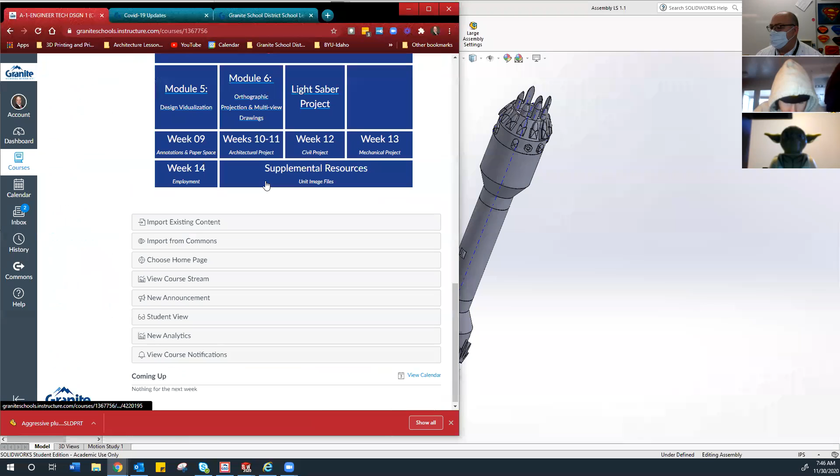So things are coming up for you really quick. Trying to figure out the best way to do this. Probably the calendar. You added a ton of files.

I did last night because I had to shift dates, I thought we had until the 22nd. You guys go on break on the 18th, and we're out of here. You have 2 weeks for Christmas, and then we come back and we have about 2 weeks.

Which is mostly testing and certifications. So certification, we hit the state test, and then what we'll do, because I don't know how many of you are back next semester, we're gonna do the SolidWorks certification. We're gonna do some prep for that. Most of you should not have any problem passing that at all.

And so the challenge on both situations is getting you all here. We won't see the spike in COVID from Thanksgiving for probably another 7 days. So, yay. Me and the boys had a good party.

I bet you did. Okay, so let me kind of show this up on the calendar to give you an idea. You should see notices come through on your Canvas feed coming up. But mainly what you got coming up here is in December.

Okay, so nothing really, I don't think I put anything this week. Sorry, yeah, I did do a couple things. So you got a couple of... actually no, I didn't for you guys at all.

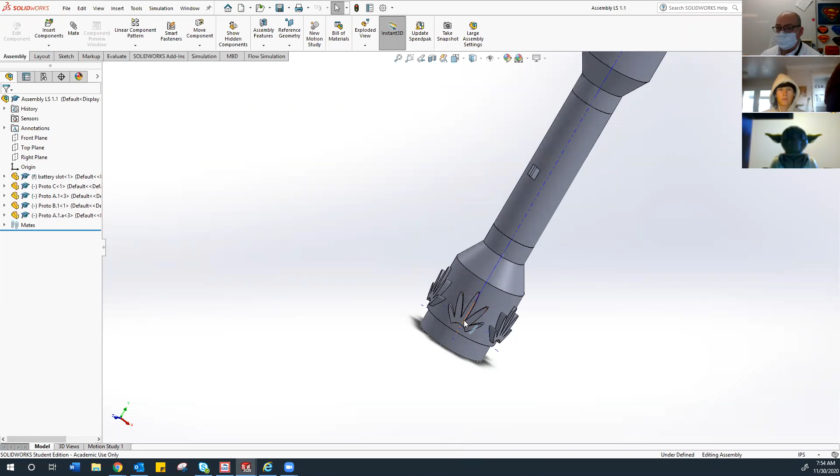Now, I'm not going to have you dimension things like your embellishments or any of these decorative items for this class. Mainly because of time and how much we've got to do for the other stuff.

So what I'm going to do here first is go into my assembly view, and we're going to create this exploded view. We looked at this about 6 weeks ago briefly and found out it's a whole new thing, which is always good. My bottom piece is my parent piece, the first part brought in. So I'll start with each piece that makes up this assembly and simply pull them apart, quite a bit apart, because it's going to take enough space.

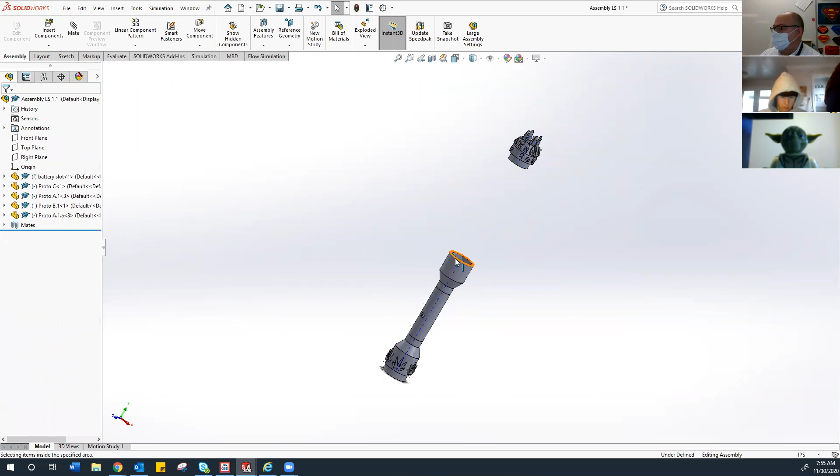Oh, don't do that, this is what I did before. Okay, so we get that one, and then we're going to do another one, maybe. Oh, this thing drives me nuts, I do not like the new change to it.

Did you ever figure out that one problem you had a while ago? Yeah, it's the same one, it keeps resetting, so we have to do different steps in it, and that's what creates the problem. So there's one. I did this fine the other day, and I don't know why it's going to fight me with it now, but it's going to. All right, hang on.

So ideally, you should be able to click on one, slide it forward. That should record a step. I'm going to just do that. And maybe what I need to do is set these all up ahead of time.

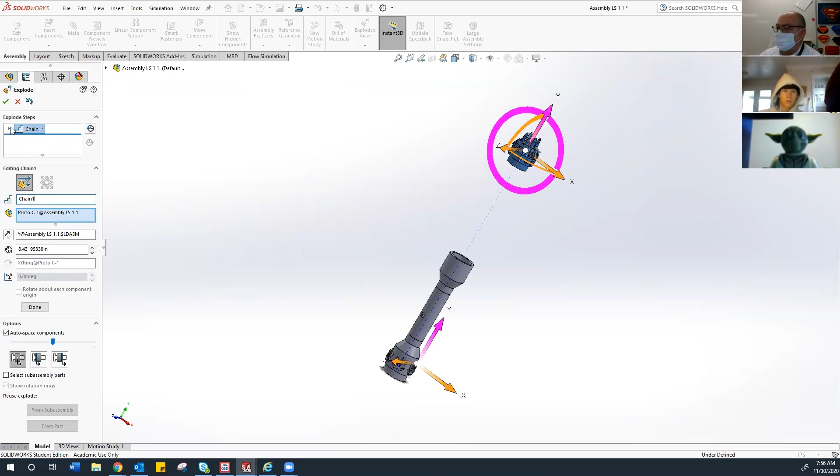So in your setup, you've got your chain happening. There's one part of it, and I need to add to that chain. That's ultimately the plan, is to add a step. So once I get it expanded out here, this is kind of the trick to it. So there's chain one, this is the proto C, that's in that step. I come down and add a step.

Okay, so I'm going to click on this, add that step, and move that where I need it to be. And it gets a little frustrating this way, but it does work. I do want to kind of somewhat try and align as I can.

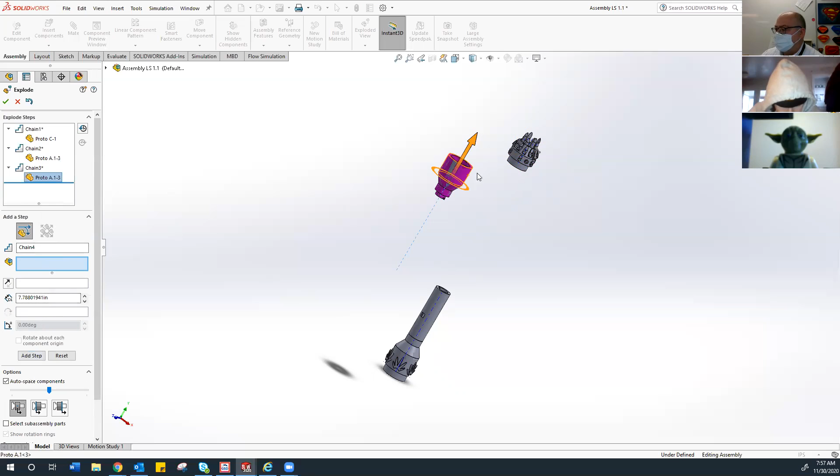So I've got these steps that are happening here, and moving things over, and each time you move, it's going to create a step. Okay, so when I do the next one, make sure you highlight the one you're at. Then I'm going to go to the one I want to change next, and then add the step.

We didn't used to have to do the add step. In older versions, you just clicked it, knew it was a different step, and that's the part I kind of miss, because it was just so much easier to align things where I wanted to be.

Okay, so that creates my exploded view. Okay, when I'm done, I'm just going to hit the word done and check it off. And that just stays there.

Okay, now I'm just going to leave it that way for a moment, because we have to change topics for just a little bit. Okay, we have to set up our paper to print these off, because we can't.

Well, it's nice to 3D print. When it goes to manufacturing or it goes to be patented, it has to be in drawing form. The patent office will not accept a 3D model anywhere. It has to be in drawing form. And it has to be very well dimensioned, because the size of things are what allow new patents to occur.

So if I'm working on... but you can't show them a 3D model? Because there's a guy in my neighborhood who said he works with patents and whatever, and he said if you bring a 3D model to drawing, you're more likely to get the patent. If you have the drawing, you have to have the drawing, because that has to be filed. So if you have just the model, you're not there.

You have to have that plus the drawing. Okay? That's what I'm saying. You can't just take, oh look, here's my little rocket, make a patent for it. This is not enough, okay? It has to have drawings with it. Okay? It has to have those drawings.

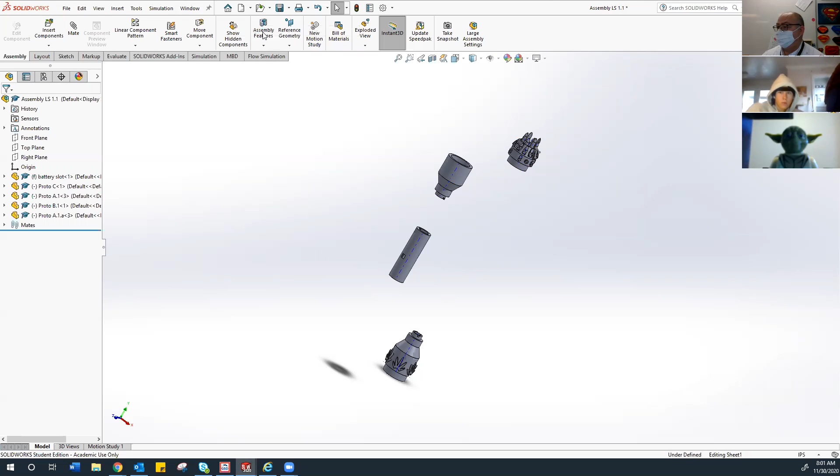Now, what we get here when you get to this point is the standard sheet sizes used in the industry, represented for our country by ANSI, the American National Standards Institute. That's a test question for both state tests, and you'll probably see it at least 4 times. It's really important you understand that ANSI is the governing body for the way we submit documentation.

So it tells us how designs have to be shown. We have a couple sizes here. An A is a sheet size, an 8.5 by 11 sheet of paper or copy paper. It can be landscape and portrait. Does anyone not understand the difference between landscape and portrait?

No, I didn't go to 3rd grade. You didn't? No, it's like the easiest question. Who doesn't know landscape and portrait? Well, you'll see on the test when 6 people miss that one.

Okay, so remember landscape has the 11 going horizontal. That's the big difference on that. Then you have B size.

No, the connection's bad. I had to go back and realize they didn't know the difference between landscape and portrait, so they're like, oh shoot, let's go Google that real quick. Welcome back, everybody, we had a little power outage there. Sorry about that.

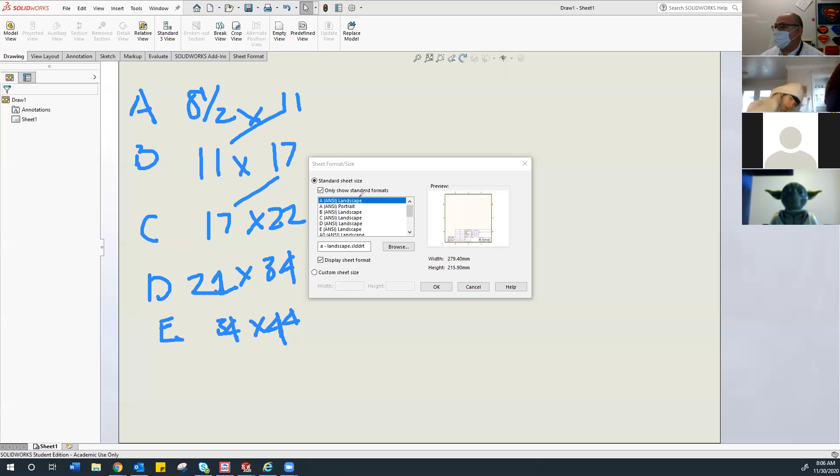Okay, so for this project we're going to use an ANSI B. I'm going to clear my screen here with this ANSI B landscape, and I'm going to go ahead and open that up. Now when we open it, on the right-hand side you're going to see your lightsaber in all its glory. You should also see the exploded isometric, that's what we set up ahead of time. If you don't do the exploded view ahead of time, it will not show here, that's the big key on this.

Now, as we look at this drawing, there's a couple things about engineering paper that's important. One is if you get a phone call from someone in, say, India, and they're doing your manufacturing for you. India typically does IT work more than anything, but they do have some manufacturing. They do whatever they're paid to do.

But maybe we're having some manufactured, and we have it manufactured in a different country.

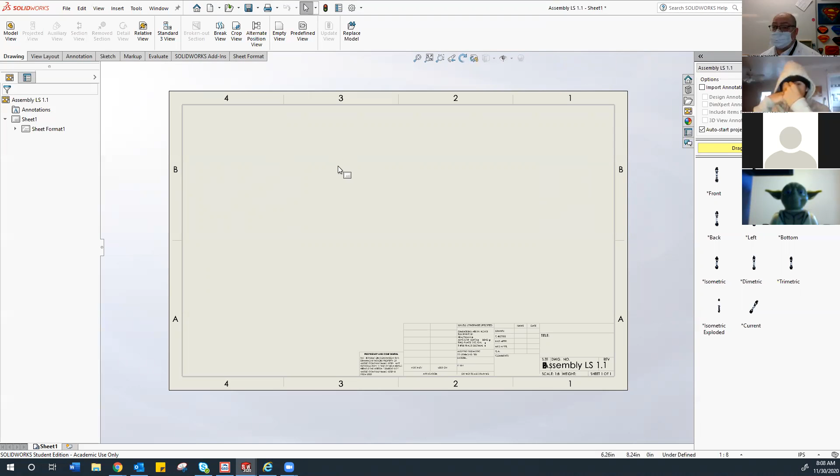So when a manufacturer calls you and says, hey, I have a question about this detail in B3, you can look at that information and say, okay, I understand, this is what you need to do. Or maybe I don't understand this note you put in A2—what do you mean there? Well, A2 is my title block area. So if there's information here, we need to be aware of that.

So we need to get everything adjusted so it all fits on our sheet, and what you do on this sheet will apply to all of your sheets. Some of you will have six sheets, some will have ten, depending on what you've done with your lightsaber and how that's going.

And we are really having a hard time with the internet today.

Hey, I have a quick question. Yeah. I was trying to draw something, and all of a sudden this blue background came up around the drawing, and it wouldn't let me do anything in the model. I closed out SolidWorks and opened it up. I took a photo. Yeah, let me look at it a little bit here.

Okay, so let's zoom down on this title block a little bit. It will have the name of whatever you name your file, and in this case, it doesn't fit in the title block—it's too large. So that's one of the issues you have to work with as you go. We have a title area and a blank space above here.

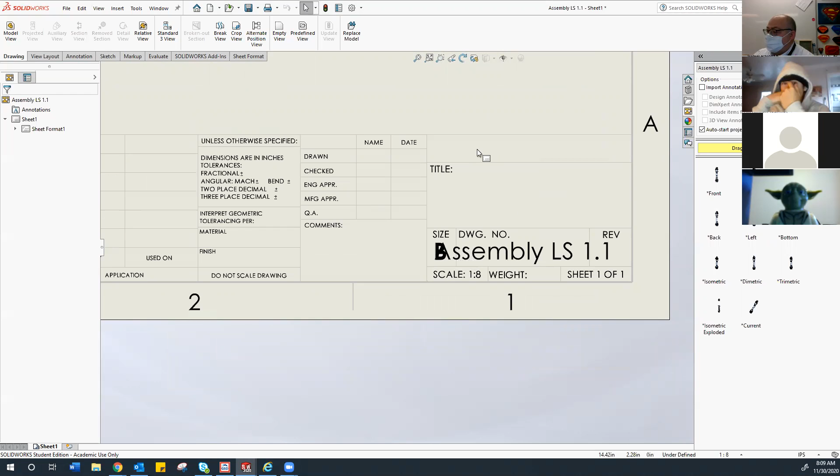We're going to set this up to what needs to happen here so it hopefully carries through. But in order to do that, we need to edit the sheet. Now this is where it gets a little cumbersome—it's meant that way because we don't want to erase this by accident. So over on your left, it'll say Sheet 1, and underneath that will be Sheet Format. Let's take a look at what we can do with our sheet as we move through this.

If I right-click on Sheet Format, you get a whole bunch of information—you can put a grid to it, edit the sheet format, lock the sheet's focus, add a sheet, copy a sheet, delete it, access its properties, and there's also all your constraints that go with it, like your relationships to snaps.

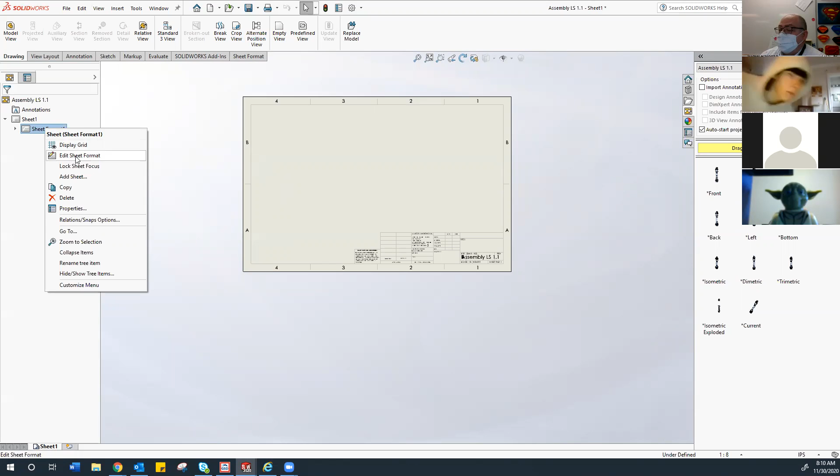Go ahead and select Edit Sheet Format. When you do that, the part you can edit becomes blue—everything's outlined in blue. This is what we can edit, and that's a good thing, so now I know what I can edit. Notice things have changed—I now have columns and grids like in a word processor across the top, as well as a ruler going down the side. So if I zoom up on that, those columns will adjust to that zoom factor.

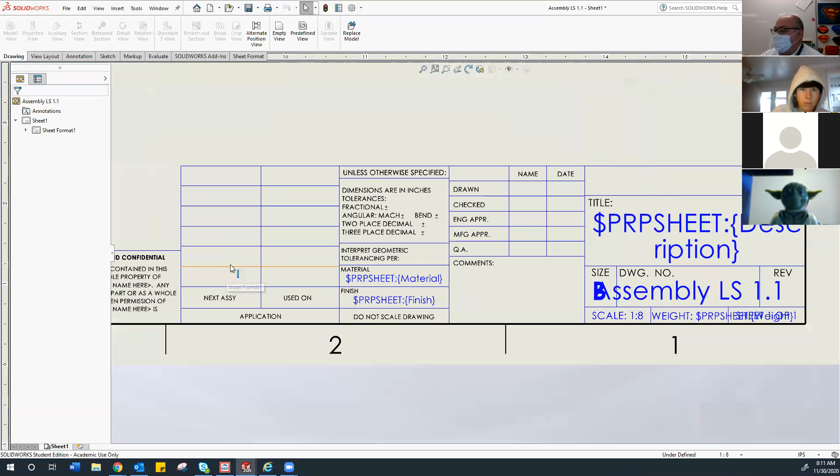And what we want to look through here is what we want to change. So one, there is a proprietary confidentiality statement given. As soon as you put your work on a title block with your name and a date, it is automatically copyrighted. It is not trademarked, it is not patented, but it is copyrighted.

In 1990, Congress passed the 1990 Copyright Act, mainly for the music industry. At that time, China was being a little more bold than they are now with ripping off music albums and selling them wholesale.

That Copyright Act meant you have intellectual right to whatever you put your name and date on. So if you're working with a client on a new design—say a new bike or a new sprinkler—anytime you do a sketch, anytime you run anything in your design process, put your name and the date on it. If I'm doing a house plan and sketching on notebooks or napkins, name and date, because that holds my intellectual right to that design. Does that make sense?

So here we can edit this text, and you can come down here and in the brackets—you have to double click—you then get a text box, looks like so. When you get to that edit mode, you can come in and create either your name or your company name. This is my company.

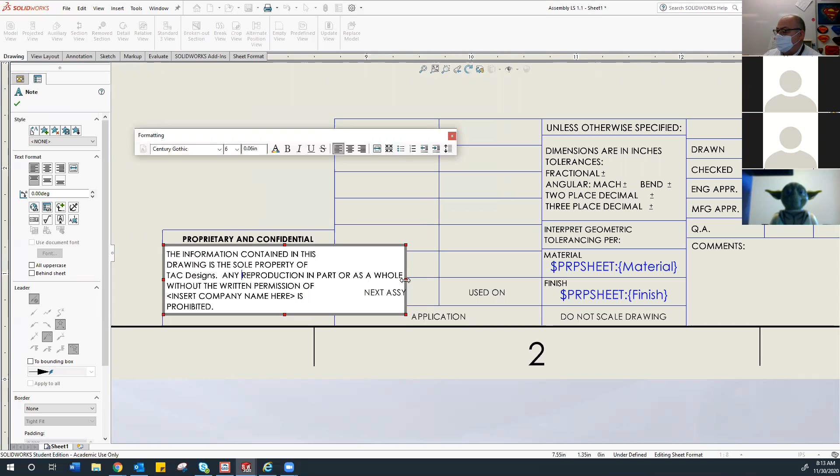And then you can adjust your sheet and such so that you can get everything to fit into that box. And so you kind of work with that.

Again, it's two places where that has to occur. And if you don't have a company, you can just use your name, and that works. You just kind of get that in there so that you have that intellectual right. That's the first thing you want to always adjust on your title block. Make sure your name is there. Now, some companies choose to remove that. That's their choice. They do it another way, with legal documents instead. But you do want to make sure you have that.

And then do take the time to go in there and clean up the formatting so it's a little easier to read. You know, just kind of like you do for your English teacher that you hate. Make it look neat, okay? Just take a few minutes, because this is what people are going to start judging you by as a designer.

Okay, then we have the application set here. This application is dealing with how this relates to something else. So if I was designing a battery compartment, and that battery compartment is going to be used on multiple products that I design. So maybe I'm doing night lights, and they have the same battery compartment for every night light. Then I would say, okay, this is where it's used, and it's used on this part. So this part of the assembly is used on this other project as well.

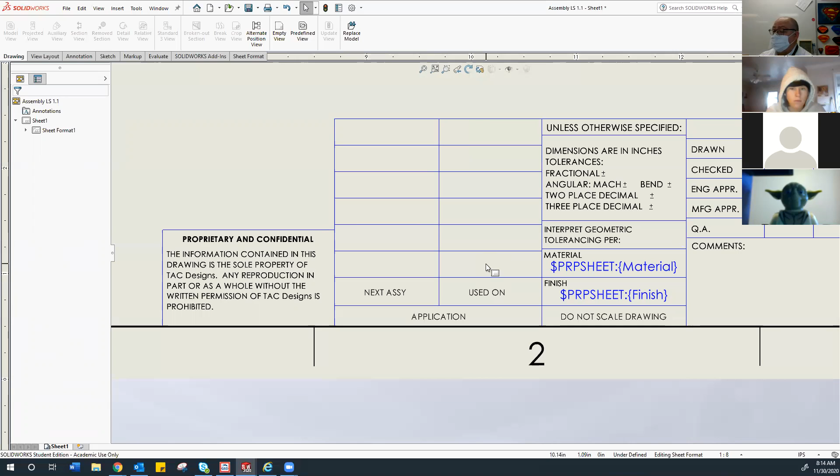You start cross-referencing your files so that when you have your office running well, you know to tell your employee, okay, go get part 7429, and that's going to go with 1830. And you start mixing and matching. So if you go into an auto shop store, you often find that type of thing happening where all the parts for one vehicle are cross-linked by number. And if they are universal in their nature, say like a light bulb, it's cross-referenced as well, okay?

Then we have over here, unless otherwise specified, dimensions are in inches, because this is an ANSI file. If this was an international file, it would be in metric. And this talks about our tolerances, our fractions, our angulars, plus or minus, and notice there's these plus and minus. So tolerances are a deal here.

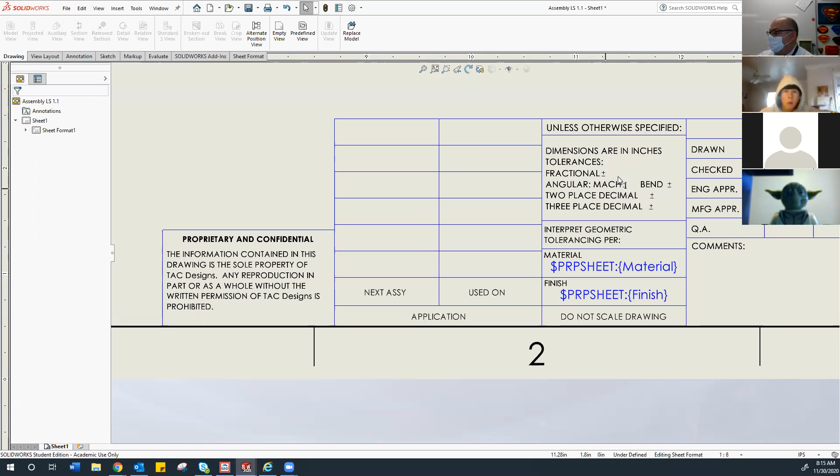Let's edit this now for what we're looking at here. So we're going to double click in this area again. So dimensions are in inches, and then tolerances are going to be a space, and we always start with 0.003. Okay, so we're going to 0.003 of an inch in accuracy for our tolerances.

Our fractional values, okay, are going to be plus or minus. And the thing is we typically do not put fractions on an item, but we're going to put one here. We're going to go to nearest 1/64. Plus or minus a 64th, which gets us pretty close to 0.003, but not quite.

Go have angular for the machine and angular for the bend. I usually leave these blank because I'm not doing any angles on the lightsaber. So if they're not there, don't do them. If you then do angles, then we want to put those in. These are degree marks, and so in order to understand that, I usually do not do any degree. That is, again, 0. Notice my title block expands.

If I'm machining it, I'm not going to go any more allowance than 0.02 on that. Back that up. And then same on the other side. I'm doing a bend. And now I notice I'm not quite fitting anymore.

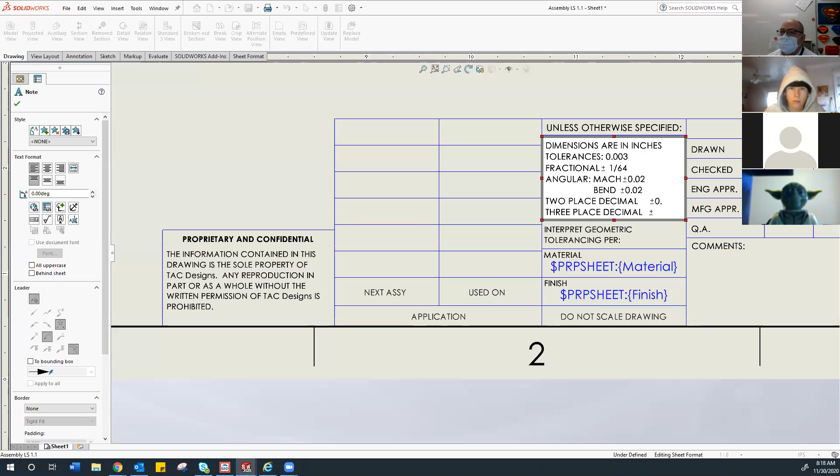If I'm using 2 places of decimals, that's going to override this. So if I'm doing 2 places of accuracy on a decimal, start with a 0, because the decimal point may not show up if they Xerox this, or even photograph it. We want to make sure they understand there's a 0 there. So if I'm going to 2 places of accuracy, that's 0.02. Let's go 2 there. And if I go 3 places, 0.003.

So I'm a little looser on the 2-place accuracy, but a little tighter here. This will all come from working with your engineers and design charts, and we'll look at some of that today as we go through. So this is kind of a heavy lecture day, so apologize for that, but not really.

So once you're done, click off of it and it's set there. This information, if it's here in the title block, I don't have to put that on my drawing. It's taken care of, and that saves some time.

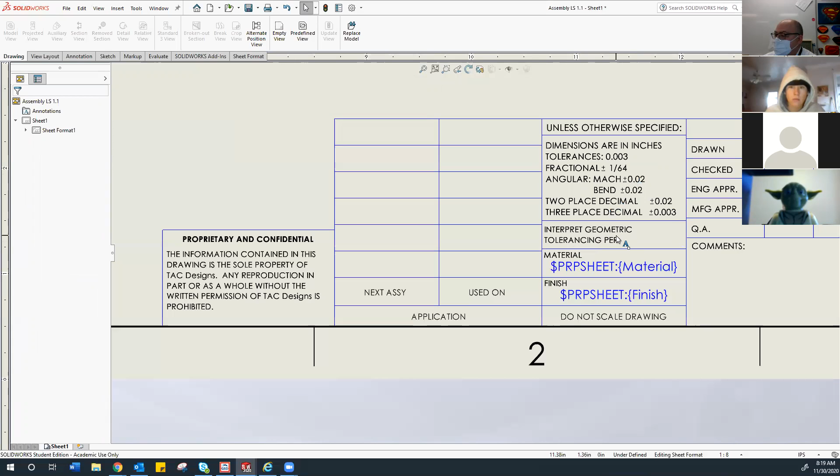There's interpret geometric tolerancing, I usually leave that blank. And then we have material. This is a hyperlink, so when we assign a material to your lightsaber, it will stay there. I'm not going to worry about this or the finish because we have not assigned that yet manually. I'm waiting for you all to get them done so we can do this all at once, and then we'll get that assigned. Kind of fun.

Sliding over, this is going to be super duper important. Your name needs to fit in here. Now here's the deal, your names will not fit in that box. So now we've got a little bit of a problem, because some of you have the same initials, which makes it really difficult to figure out who's who.

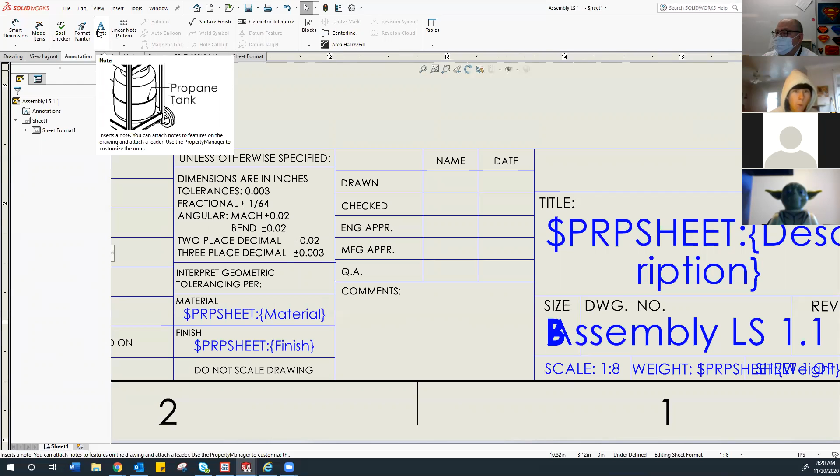So if you're going to add text to a box, which is what we're going to do, I need to go to the top of my screen and hit annotation. Annotation is the proper word for text and numbers. I'm just going to add a note, and then bring that note over to my text box. Now if you hit a line, you're going to get an arrow to it, called a leader line, which is great for the drawing, not so great for the title block. So if I'm trying to get that in there, I've got to position it so I don't get the leader.

And then I'm just going to put in my initials. That's all it's going to take. Now that is going to be way too tall, I can see that already. It's not going to fit well. If I click off, it'll work. But notice anything else I do is going to have that same text, so be aware that once you start typing things, it's going to be the same.

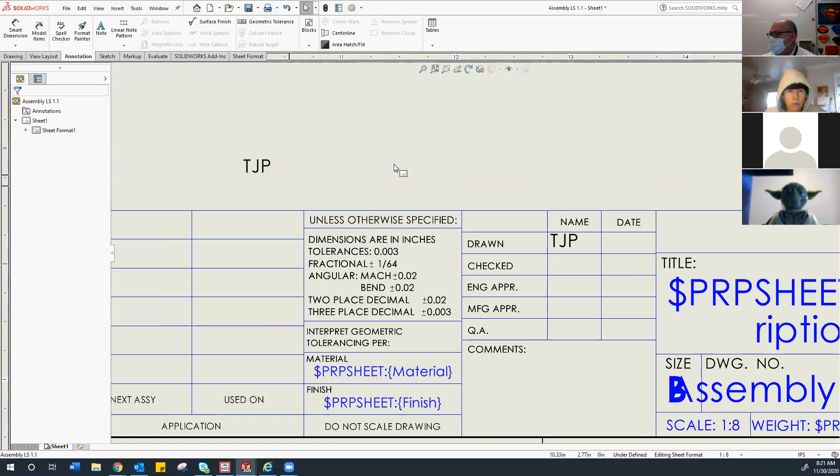So I have to go back in and make sure you hit the green check mark to end that line of text, and you might end up with extra ones on there. Just select them, maybe, and get that to go away. Weird.

You could make an annotation, a note. Oh, it wasn't there, it was a ghost. And then put the date in as well.

Now the date, this is kind of a tricky one because it's dependent upon your office standards. In some offices I worked in, you put the date you finish the project. Others, you put the date you start the project. We then put the date you finish the project.

So again, you want to get your text box. If you have a hard time getting rid of that leader, put it up above. And this is the format we're going to use for our dates: we're going to go the month, slash the day, slash the last 2 digits of the year.

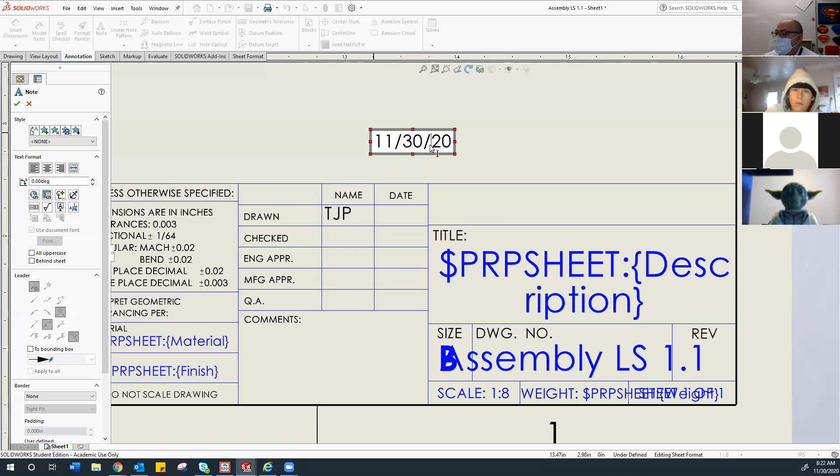Now we're going to have a problem in about 80 years. Here's what the problem's going to be: CAD software only started in the 1900s, so 1980 actually. So we know that if we could have this be 1920, it would not be 1920 — we know that because of the nature of the drawing. Once we get to 2120, we're going to have to start including all 4 digits of the year. So your office may say, nope, put the full year in, because they want to avoid that problem with archive drawings in the future.

Some of you that go and work for an engineer, your first job is going to be cleaning up the archives. That might mean going down and actually moving drawings and file folders, or opening up the digital files and making corrections to those.

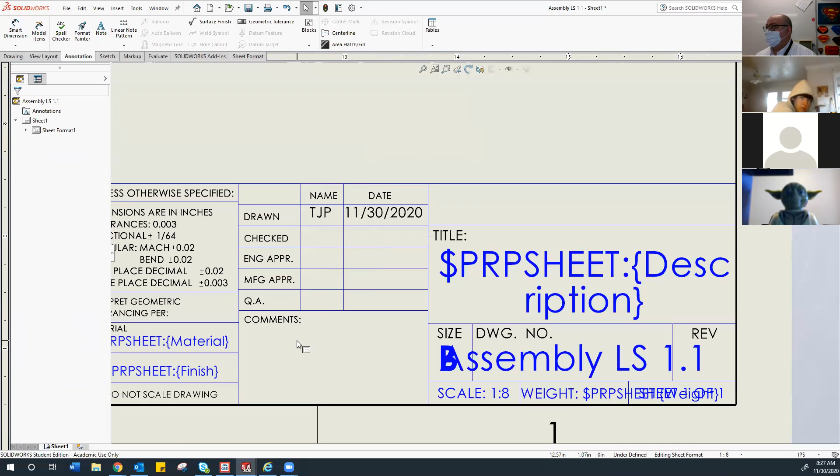Then you've got your manufacturer's approval that says, yes, we can make it for the price we agreed upon—we have the tools set up, we have machinery set up. Then there's a Q.A. area: who do you contact if there's a question? That's usually going to be the lead designer on the project. And then there's comments—things like, hey, well let's put one on. Well, we don't have one that we set up, so it might be something that says all fillets are 0.25.

Okay, so Mustafa's giving me a text chat here. So in your comments, there'll be things that are standard for it.

So you might say something about, well, we'll do this one. I think this is one that exists for a lot of you. I'm going to put a little text down in here, and on this it says all fits are friction... let me get my fingers in the right place. Hold on, disparage me later. So that's a legit note there. It reads funny, yes, I know that.

All fits are friction fits, meaning it just slides together. I didn't do any threads, I didn't do any fancy connectors, there's no peg and hole system—it's just a friction fit. Because the manufacturer is going to question you: how are you holding this together? Well, it's just going to be a friction fit. Or it could be all fits are glued. If you're going to glue them all together, then you have to say they're going to be glued together. I know it doesn't look like they're going to stay connected, but my intent is you glue the thing, okay? Because that will be a different set of costs to the manufacturing. If I've got to go through and have someone glue these all together before I ship it out to sell, then I need to include that in my estimate of cost and in my bid, okay?

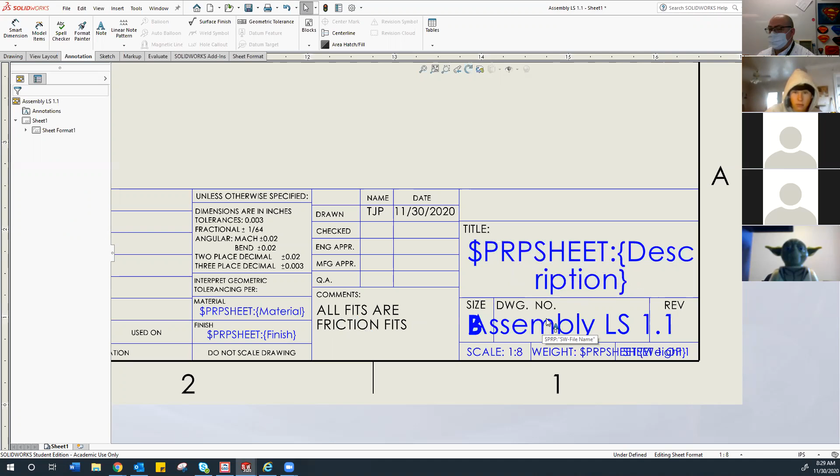Well, that doesn't say a whole lot. You can edit the name. Double click, and we can get that font. I'm just going to change the name. And notice I'm now working in capital letters. That is industry standard.

We do capital letters. Why would we do all caps? Because it's important? No. Here's a couple things to disparage your poor English teacher. One, if you type an email in all caps, you're yelling at people. That is what it defines as. If you do all caps, you're yelling. If you bold all caps, you are furious with it.

Okay, in engineering and architecture, we do all caps because it's easier to read. If I had a lowercase e and an a here, and I Xerox this sheet a lot of times, maybe it was a third generation copy, I wouldn't be able to tell the E from the A. It's going to get a bunch of shadow effects and toner marks. So in our industry, we do all caps for ease of reading.

It keeps making mistakes. The only time you use a lowercase letter is if it's part of a catalog part number. So if I need to order battery E724A, I would put a lowercase for the E, because A would most likely be capitalized. So if it's a catalog reference, I match it exactly as the manufacturer says to use it, so I get the right part, because capitals mean things in our industry. But for what we type, that will always be all caps, okay?

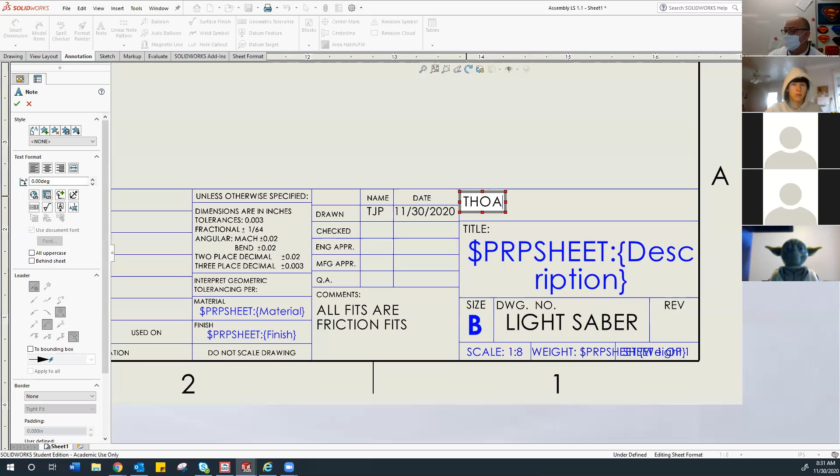Now, what I like to put in this top blank right here at the top of your title block is your actual full name. Mainly because there are a few of you here with the same initials. So it's another note, just here at the top, and just type out your full name. You have to remember not to space. Just put your full name there, so it's quicker for me, okay?

Now, this here will happen with your title block size. If you change your title block size, this letter will change. And down here, we have... I can't remember what this is down here now. The weight of your object and the scale. Right now, the scale of this drawing is 1 to 8, which means it's an eighth of its actual size. Well, that's probably not going to work, but it's going to work for what I need right now.

So we'll look at these as we get more of you finished with your lightsabers, okay? Because you're going to render them out as well, since we need to do some rendering. And somehow we're going to get this all done in 2.5 weeks. We can do it. Okay, so that's all to have you change.

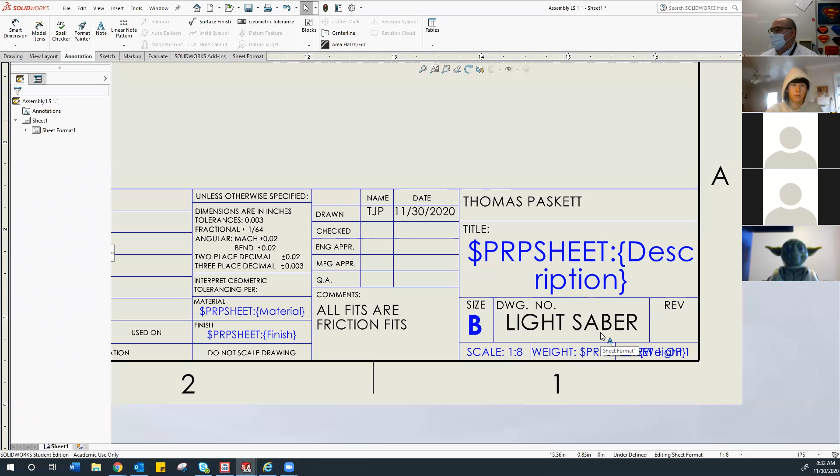Let's talk about the revision box right here. If you get your lightsaber done, you print it and you come back and say, hey Dr. Paskett, I really messed up, I gave you the wrong part and they don't fit together, I need to redo this. Then we'd have revision 1. So we always start with no revision, and then we number each revision so we make sure we keep the drawings correct, so that if we have to reproduce it, we're not getting the wrong file out there.

Really, really important to keep track of revisions, especially as things evolve over time. So if you look at Air Jordans, the shoe, how many versions of the Air Jordan shoe have been produced since Michael Jordan played in the NBA? Each one has a revision number. Nike can go back and reproduce any shoe that you want them to. Everything can be rebuilt. You just have to call them up and pay the special processing fee, but they can redo any shoe they've ever made. It's all in their system because they have all their revision numbers.

Super, super important, because there are some people out there, mainly people who make a lot more money than I do, that will only wear one type of shoe.

And they have to have that shoe for every game, or if it's not lucky, they're going to lose. Shaquille O'Neal is one of those. He's worn the same type of tennis shoe his entire career. That's the only one he'll wear, so they custom make the shoe.

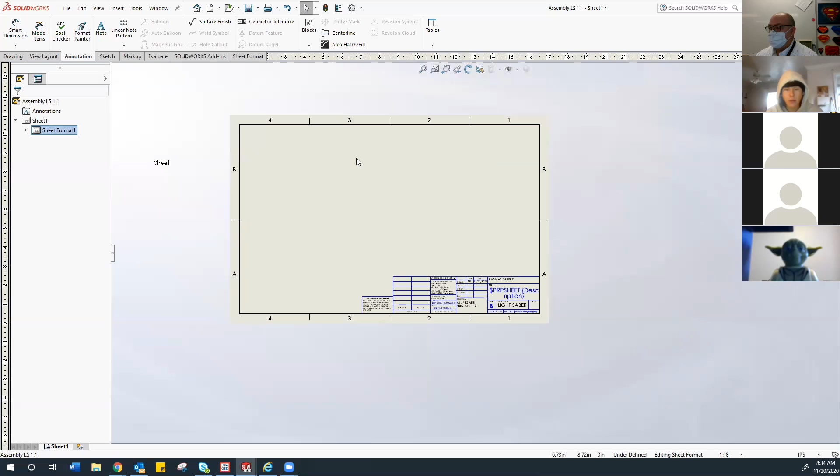If you're over the side, you get one set of notes. If you are over on the drawing and you right click, you get a different set. So if you go down, you'll see edit sheet again. If you click edit sheet a second time, it takes you out of the edit mode. It's a toggle—either you are or you're not.

You can also find it under sheet format. You can edit the sheet, or you can right click and hit edit sheet again, and you're out of the edit mode. That's how you get out—you just reverse what you did. Okay, so everything's down in here.

Let's talk about this scale issue. Your lightsabers are supposed to be 12 inches or less, okay? So if my drawing is 17 inches wide, because it's a B size, I should be able to fit the whole thing on in real life size. That's really assuming an awful lot, so 1-to-1 would be great. Now for this first sheet, that's probably not realistic because I've exploded it and pulled it apart. I'm probably closer to 20 inches wide with it now.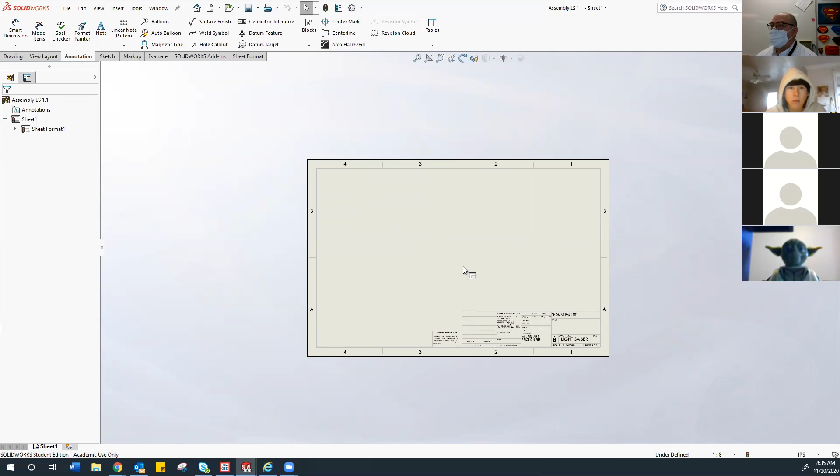So I'm going to change the scale of this drawing. I'm going to come back over to the sheet. If I look at sheet 1, it says sheet format, and I right click—oh wow, look, I get the exact same tools. The same tools come up again, and that's intended, but you need to make sure you're clicking the right place.

They look exactly the same, but this time I want you to go down to properties. So we go to properties and we get everything about the sheet that we want here. There's a lot of information here, and a lot of it applies to your state test. So yeah, we're getting down to where it's all getting exciting. One, it tells them I'm sheet one, and I'm going to leave it sheet one for right now. I can come back and rename the sheets anytime I want.

And I would do that so that I know what I'm looking at. As we finish through this week, we'll do a lot of renaming, so just be aware of that. It's a good exercise to use. It's the same process you use for Excel, for those who have the Excel class. The same process you use if you do multiple PowerPoints. It's the standard Windows activity.

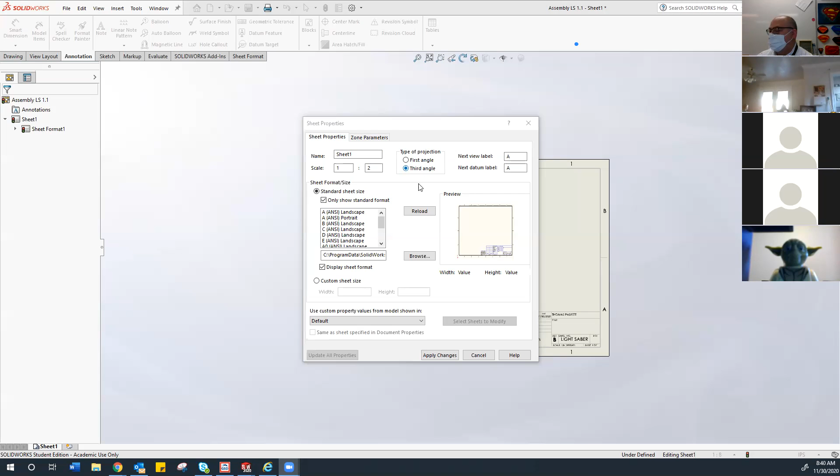Okay, go ahead and hit apply changes. And if we look now down at our title block, the scale has changed. Our sheet number is still sheet 1 of 1, but we haven't put a weight. We cannot get a weight until we assign material and finish it. So that will be coming as we go.

Okay, so my title block is ready to use. Woohoo! Now the fun begins. You will have eventually a rendered image of your lightsaber on this first sheet. But we also need to explain what is on the sheets to come.

This is our title sheet, meaning it's going to be just like you would do in an essay, a novel, or a book. We have to tell what we're going to look at and where to find each element. Now, remember on the right-hand side, I used to have a whole bunch of stuff there. That's kind of gone away as we worked on things.

So over on the right-hand side, you have a little house - that's your resources. Then you have the design library, we'll look at that probably next week. Then you have a file explorer - woohoo, that's kind of cool, which is just like the one at the bottom of your sheet. Then you have your view palette. That one's going to be important, so remember view palette for right now.

Materials, you have your custom properties and your SolidWorks forum. The forum is kind of like, hey, I've screwed up my drawing, how do I fix it? And people who are nice will help you, and people who are not nice will make it even worse. So read carefully in the forum - there's some real jerks out there.

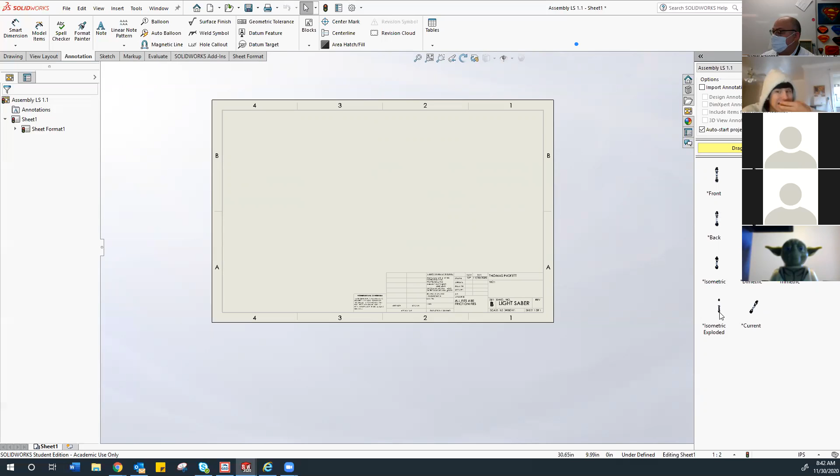I did the explode view intentionally, so I take the explode view and click it with the left mouse button, then drag it onto the drawing. That is not the view I saved, but it'll work.

How nice. Okay, now if I look at that and look at my exploded view, that really wasn't the one I wanted. So let's go to the current view and see if that one's better. Oh, no. So I'll put both views on, okay? Basically, they both will work for what we're doing, and maybe it'll be easier if we just skip the exploded view.

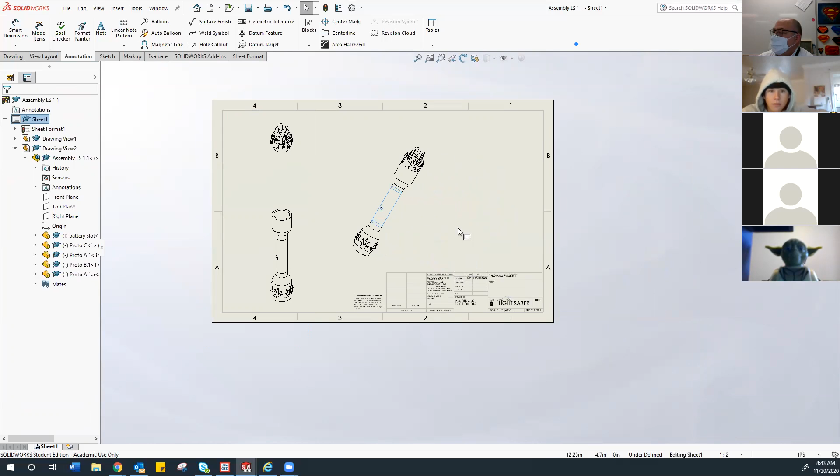I don't know, I like the exploded views when they work, but when they don't, they're kind of a pain. So I have my views on here, and go ahead and put one or two views on your sheet so we can talk about what we can do there.

Now, when we look at these, obviously I'm missing what I thought I had saved, and I apparently didn't save it right. I could probably do this - go back into assembly and just hit save. Well, it didn't save it, did it? Huh, interesting. Okay, never mind.

Don't worry about it. Don't worry about the explode view. I've got to practice it better so I can teach it better. I messed that up enough. I'll take full responsibility for being stupid there.

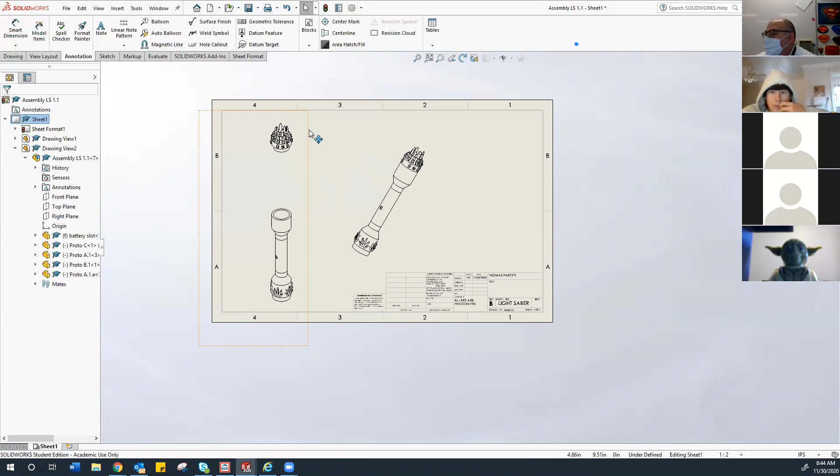If you get a view in that you don't want, your cursor floats around to get an orange outline of the viewport. If you don't want it, you can select it, right-click, and then delete the viewport. It'll ask if you want to delete that view, since it doesn't want you deleting things you're using. I'll hit yes there, and that view is gone, so now I have this view left.

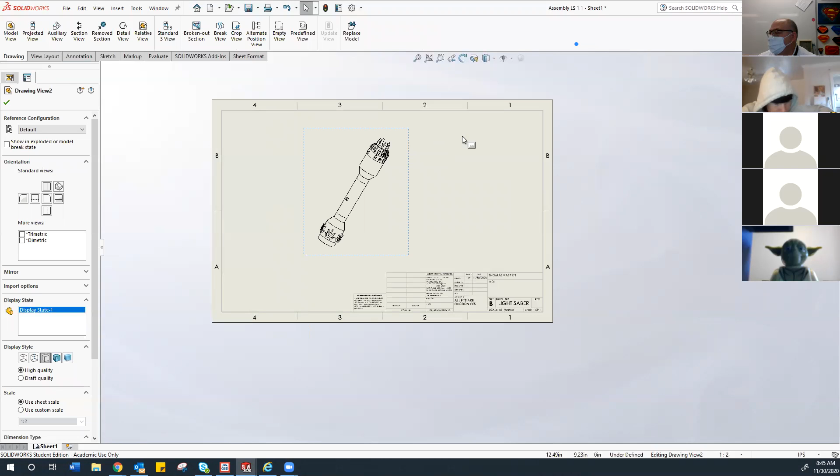Now, you can also take a view and copy it. Up here at the top, if I'm in my drawing area, I can take that view, hold the control key down, and drag to copy it. There it is, copy the view. Paste. It gives you a warning because, depending on how you've done your features, it may not allow you to copy them, especially if they're hidden. So now I have two of the same view in the drawing.

I can take one view, and if I go to the side, it will show me that they're in standard view orientation. So there's the view orientation we've been using.

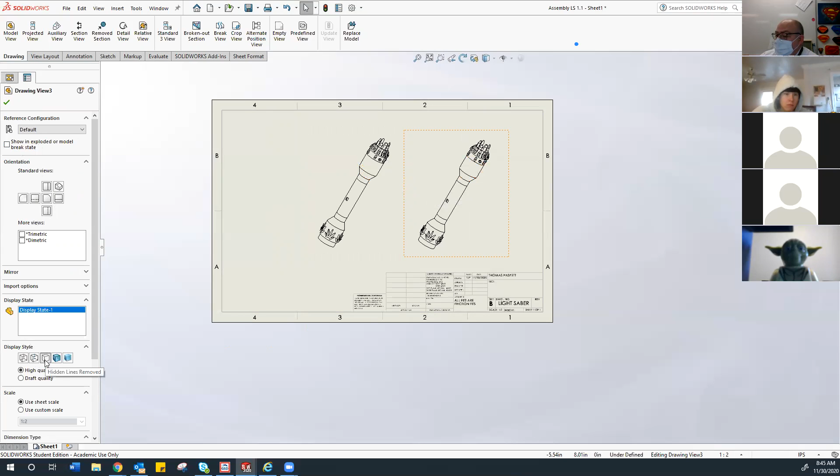But down the bottom, if I switch it to shaded edges, I can get a shaded rendering in there. Ultimately, we want to create a rendered image to bring in so it has some color to it, but this will give you one view of that.

Typically on your cover sheet, which is what this is, you would show a shaded view. That shaded view, because it's not easy to see everything on it, would maybe have a different scale. I've got it highlighted blue, so I know it's there. I scroll down, use a custom scale, change it to 1 to 4 so it's a little smaller, and when I check that off, I can move this view into a different orientation. Again, it's just a thumbnail right now to show what's going on here.

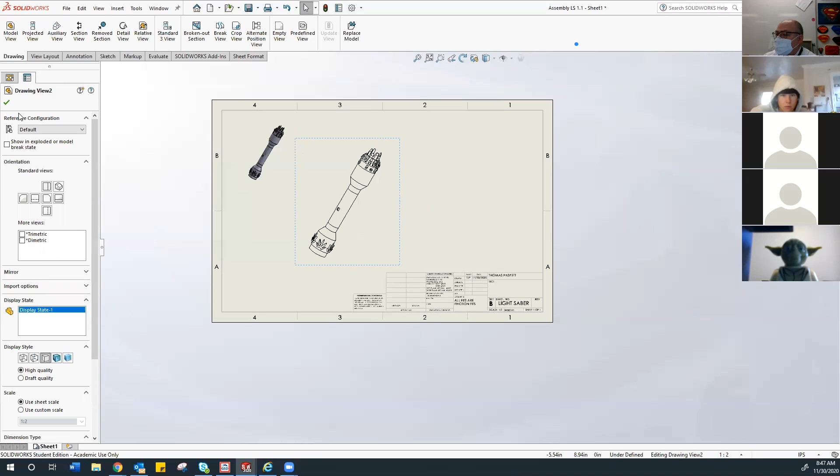Now, what you want to do is never put your drawing in your title block. That's considered a real big no-no. But I now need to set up a table of contents for what's going to happen here.

All right, are we with me still? Yoda's still hanging in there, Kaden? Yeah, I'm still here. Oh, good. I'm so glad you're having fun today. Thanks. Yeah.

Okay, now this next part's a pretty powerful part of SolidWorks. I'm in the drawing, the drawing tab itself. As I go across the top, there are projection views that we'll look at as we get to the next sheet, and section cuts, relative views, and standard views. We'll look at all of these throughout this week, even though it's only 2 days that I have you.

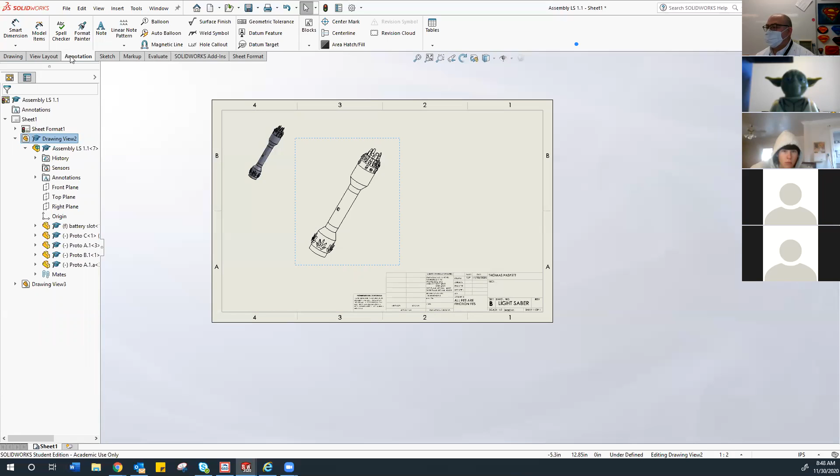What I really need to happen is a title block. So if I go to annotation and look what's in there, because table of contents would be a calculated issue. If we go over to tables and hit the down arrow, there is a general table, which is literally just a list of parts.

So let's say it's Christmas coming up, and you're building an easy bake oven that you had to assemble yourself. You would have a chart that would list how many screws you needed, how many of each were given to you, their size, how many wrenches were included, how many bolts, how many washers. That would be a use for a chart.

We're doing a bill of materials. Every assembly must have a bill of materials. That's kind of what it is. So go ahead and click on bill of materials.

And when you look over the side, it says BOM. Don't get that confused with the local religion, it uses those STEM acronyms. It can be top level only, parts only, indented, attached to anchor point, with all this justification stuff. Really what you want to do is bring that in, so I'll hit the check mark and just slide this over. It's all filled out for me.

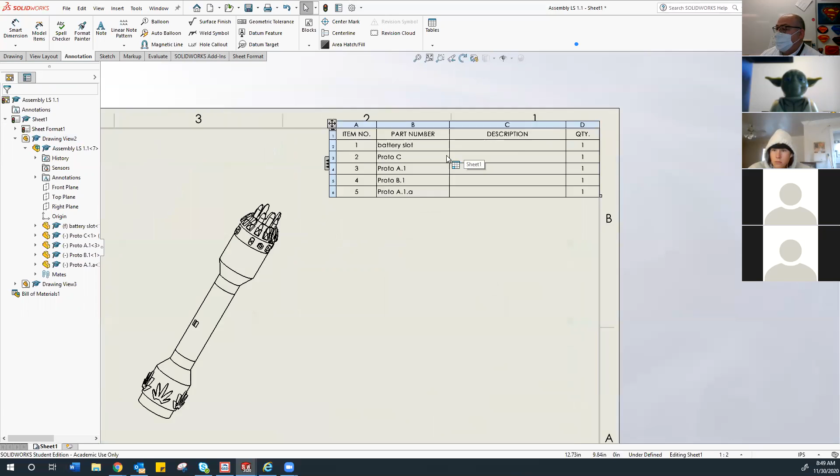I usually put it on top of the title block, or more preferred, the top right-hand corner of the drawing, and it snugs in right there. Now, every part that's in this assembly is listed here by file name. So if you change the name of your file, these will change — it's based on how you name it.

It tells you how many of those there are, and then you would add into the text a description of what's going to go there. And we'll keep the link, and we would go in.

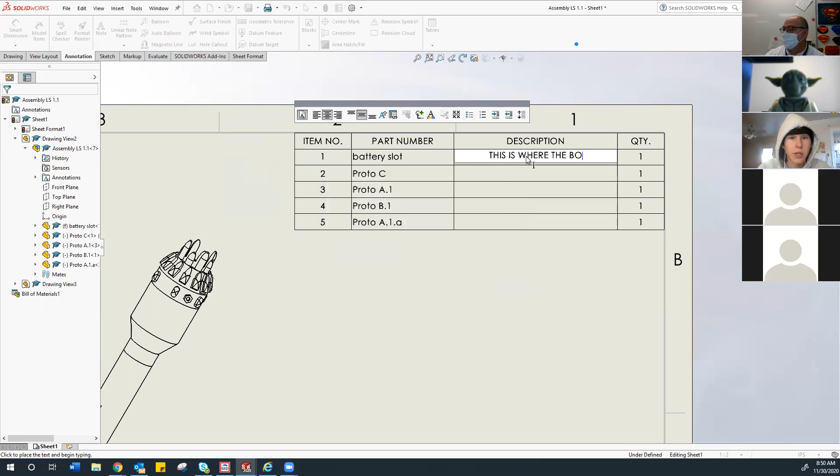Sorry, can you show me how to get the bill of materials real quick one more time? I was trying to fix something with my design. Sure, can do. Okay, thanks.

Okay, so the bill of materials is under tables and annotation. So your annotation tab, tables, hit the down arrow, bill of materials. When you select it, you can only have one per project, but it gives you justifications, then turn that off and hit the check mark and bring it right in.

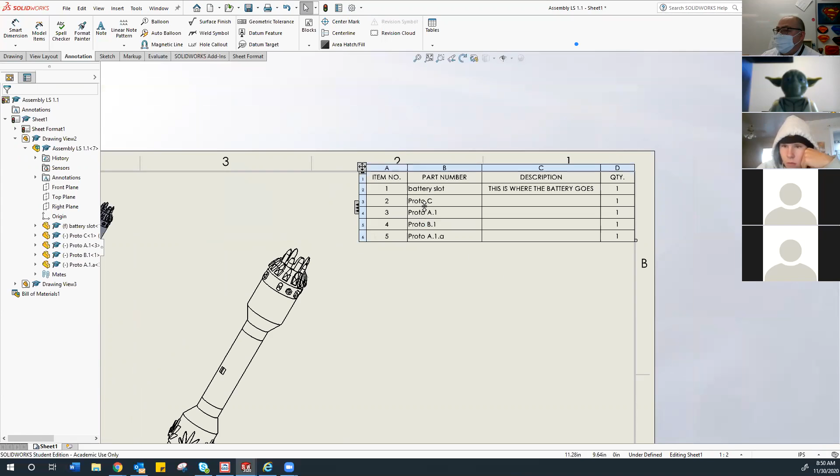Awesome, thanks. Now, here's where this gets kind of cool. I need my manufacturer to know what things are working on. This is also going to be the order in which your sheets will be created. So if I come in now, I'm going to come up to the top, and find balloon.

And a balloon is a labeling tool. So I click on the balloon, and when I come down, I select a part. So down here, my battery compartment. That's 5, 5 is proto A. Come down here lower, there's 1. Moving up the next part, there's 4.

There's 3. Wow, this changed. There's 2. Okay, so now make sure I got 1 through 5. There's 1, 2, 3, 4, 5.

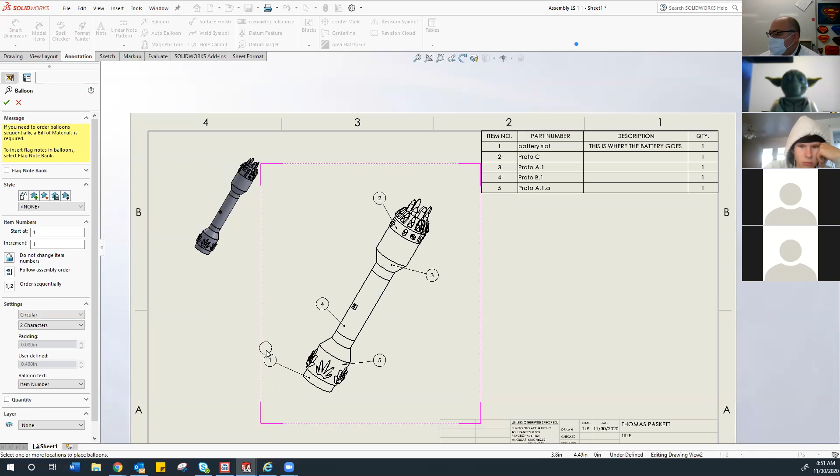My drawing is now labeled, so I know what each piece is. They're not in order because they weren't created in order. This is the order in which each part was made. So that tells me a lot about a drawing by where the engineer's process went, what they did first, what they did second, and how that was worked out.

And so now I'm good with that process, that I can now start my next sheet. So bill of materials, labeled part. Okay, I'm going to give you a minute to catch up with that part of it.

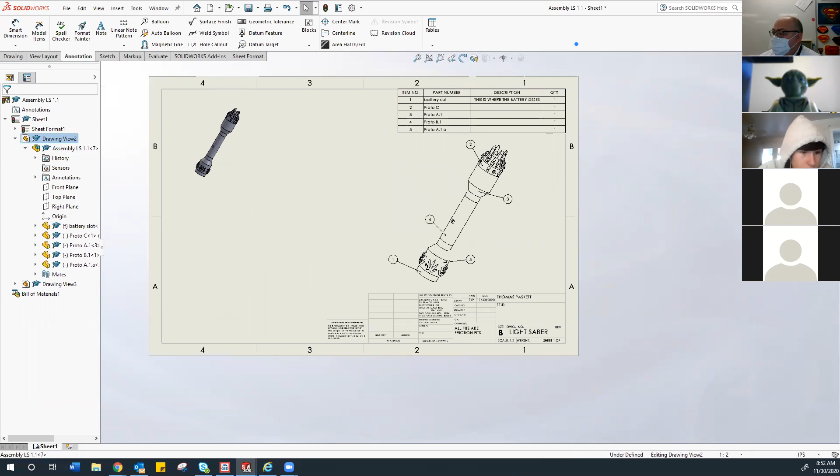Now, like I say, we're going to leave some room on here to place our rendered image, colored image over here. If you can, you just kind of position the sheet so it looks clean. You want a good, easy to read sheet of how things are looking.

Now, one last thing I need to do is anytime you put an image on a drawing, it needs a label. Okay, so I'm going to do another note, and then come over here and place it under or near. In this case, I'm going to go under because I've got room to do that. And then label it, this is going to be, and again, all caps.

Lightsaber assembly. I'm going to highlight all that. Where's my text box go? Highlight that. Titles. Where'd my box go? So the problem with having too many screens. There it is, it's underneath the text.

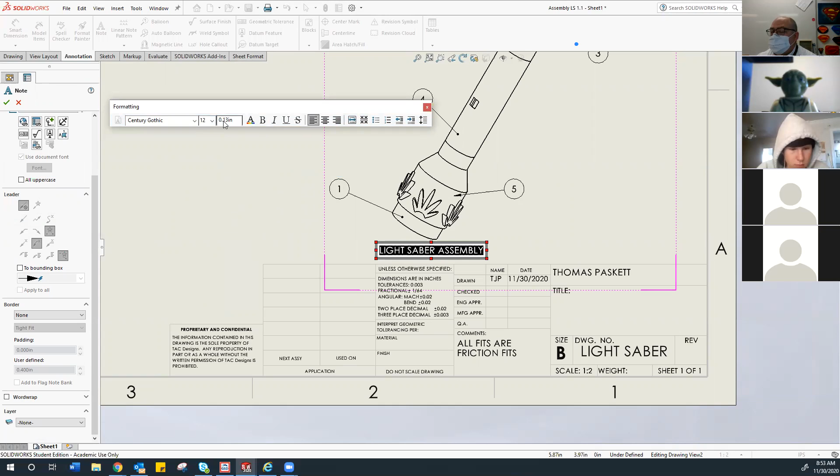Your general text is going to be either 0.12 or 0.13. Your titles will always be 0.2. They're almost 1/4 inch, but they stand out large, so they're there.

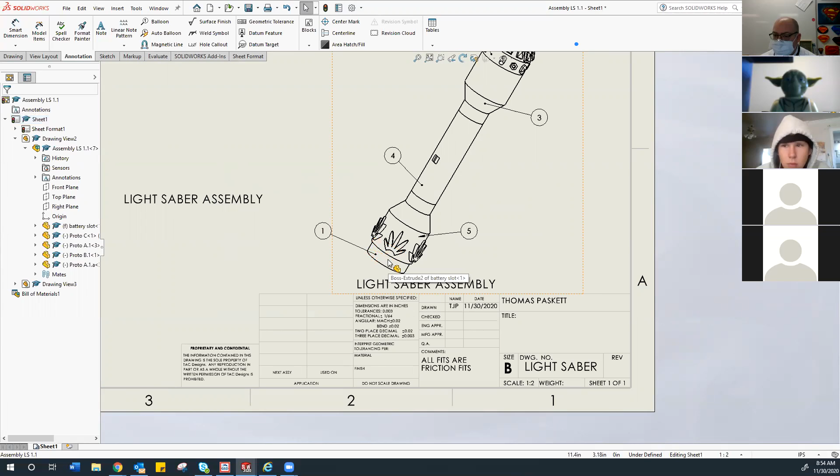And I'm not sure why I'm getting the shadow fonts, but that's happening. Cool, I don't know why. That's not really there, it's probably your video cards if you're here in the class. They're leaving these shadows, and I'm not sure why that is. Well, I do know they're 7 years old, they're dying. So you want a title underneath it.

If the scale changes, then we have to tell what scale it's at. So my drawing scale is 1 to 2. So let's go up here, let's go back to annotation note.

There it goes away. And the note for this one is going to be the same thing, and then just lightsaber. Zoom up there so I don't spell everything wrong, so you can see what I'm doing. Shade.

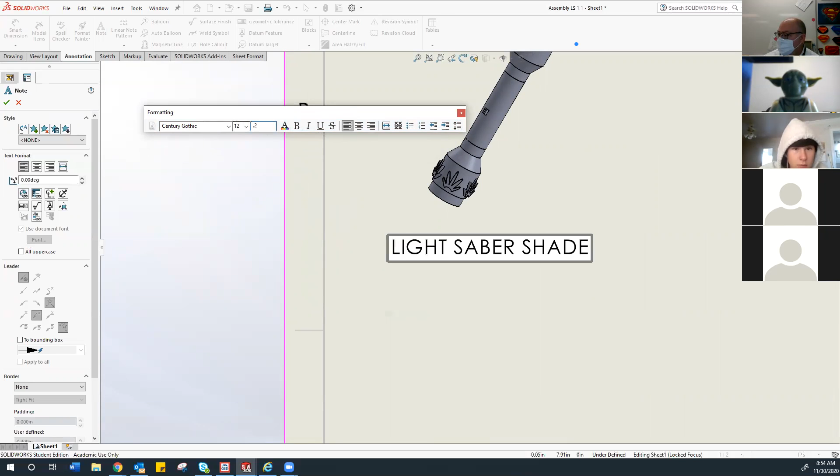And that will be a font. So I highlight that, that's in font 0.2 again. While that keeps moving. Okay, so I put that there. And then I check that off and put another note right below that one.

So right below it, and this is going to be the scale is 1 to 4, because that's what we changed it to. That will be the standard font of 0.13, because this is a different scale than everything else on that drawing, so I need to make sure I label it correctly. If it's the same scale as your sheet, you don't need the scale. But when you have a different scale, you need to say, hey, I've changed the scale, this is what it is. Okay.

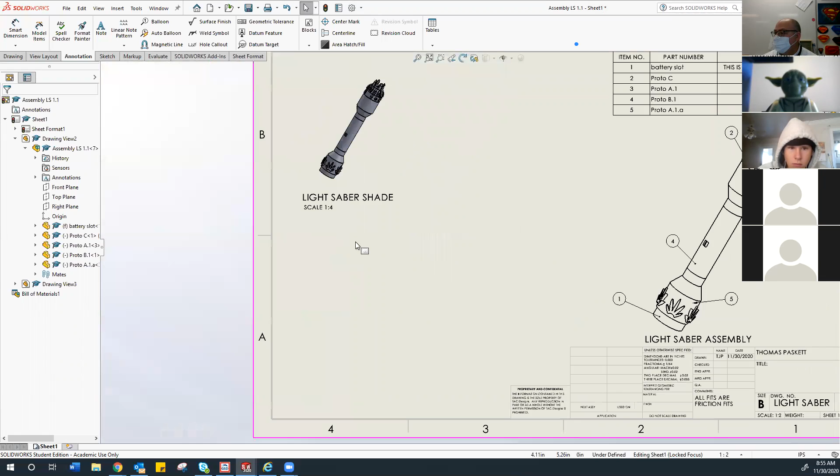Okay, wow, this is a lot of work. You guys feeling mind dumped on? Some of you are falling asleep. Too much turkey this morning.

We had duck. It was good. A lot less meat.

Donald died. Okay, that is the start of your title sheet. So that's one sheet. Now we need to start putting in our parts.

So I have sheet 1, and I go down to the bottom where it says sheet 1. I'll right click, and I'm going to add a sheet. Click add a sheet. It'll say sheet 2. And notice everything's gone that you spent all that time doing.

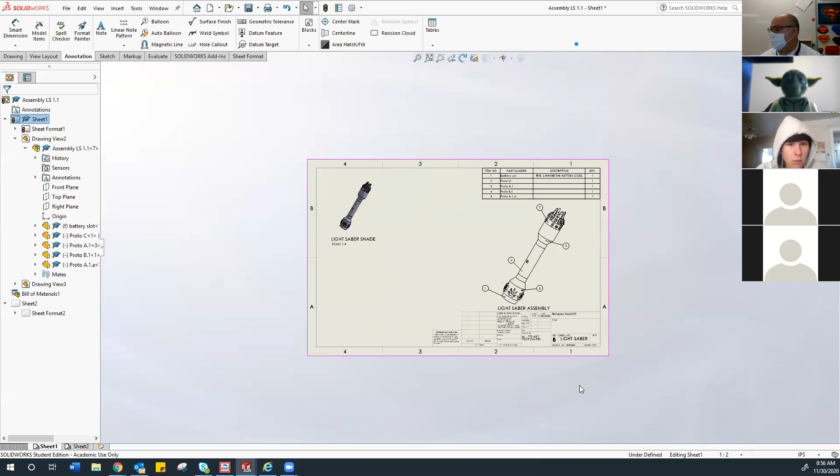Oh man, that's a bunch of malarkey. Even my scales stay the same, but my title changes, everything changed that I got all pretty. So here's how you're going to do it. That's what happens when you do add sheet.

I'm going to delete that sheet. So bye sheet, thanks for being there. And what I'm going to do is come down to sheet 1 and I'm going to copy the sheet, just to do a copy of it. Copy.

Oh, come on. No, you got to copy. Okay, I guess you're not doing copies anymore. A lot of software changes. That's no bueno. That's very bad because it's a lot more work this way.

All right, so now I got sheet 3. Happy day. You're going to have to edit your sheets. They've taken out the copy sheet command. So sorry about that. That'll work though.

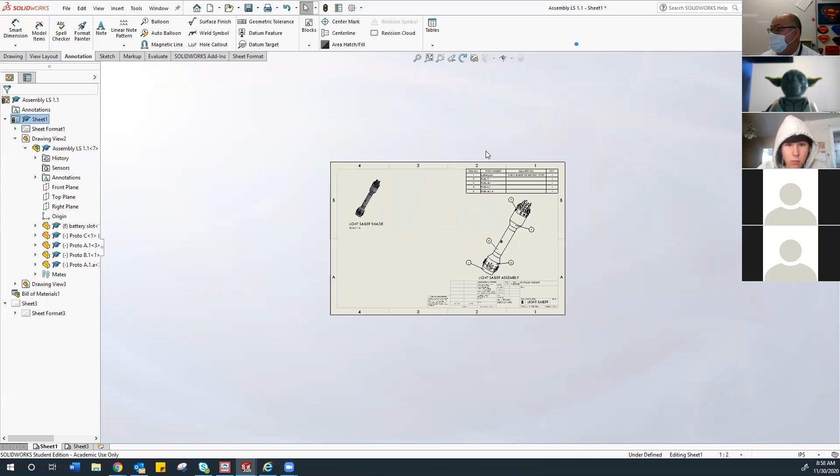And that's okay because I'm not going to use this assembly anyway. I don't want this assembly. I want on my next sheet, I want it to be part 1, which is the battery compartment. For this one, whatever your 1 is your next sheet. Does that make sense to everybody? So whatever your part 1 is, that's your next sheet.

You will have to go in and then rename the sheet now. So I do right click, rename, battery slot, so it matches what's in my bill of materials. Enter that in. Sheet 1 will stay sheet 1. We'll change that a little bit later, but we're going to leave that at sheet 1 for right now.

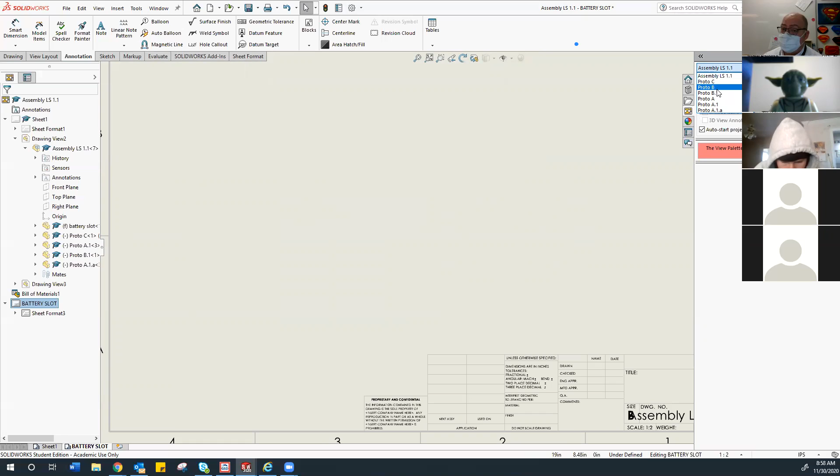In my battery area, if I go over to my view palette, oh, there's nothing there. Now, here is the beauty of what this is. It's still trying to find the assembly, but I've already used that assembly for another drawing. If I hit this down arrow, I can scroll through all the files that are currently open. So before you guys came in, I opened up all the files for the lightsaber. I can now scroll through, and the battery compartment isn't in the list.

How nice is that? So if it's not in the list, if you didn't open them, there's the 3 ellipsis dots, and hopefully English teachers taught you about ellipsis dots, because that's what it's usually taught. It means there is more. So we click on the ellipsis dots, and what that's going to, oh my gosh, what is going on here with my network?

It's going to bring up your Explorer and let you go back and find where you have saved your part. And I put it here, I don't know why. So I open that up. There are all my parts now shown. And this is the last part I'm going to show you today.

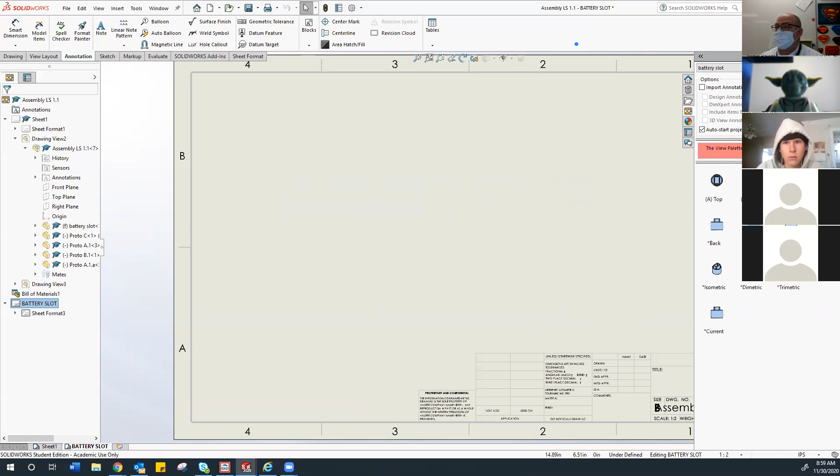And then I'm going to give you some time to work because I know some of you are going, I haven't had to work for 2 weeks, I'm dying here. Okay, all right, so my battery slot comes in, and it's got top and front and back and right.

The way you place these in your drawing is super, super important. Remember, we are 3rd angle projection. So I'm going to bring it in from the front. I'm going to take the front view, and then bring that in first, place it, go up above it, that's the top view, and go to the right, that's the right side view. These 3 views have to happen. You want those 3 views.

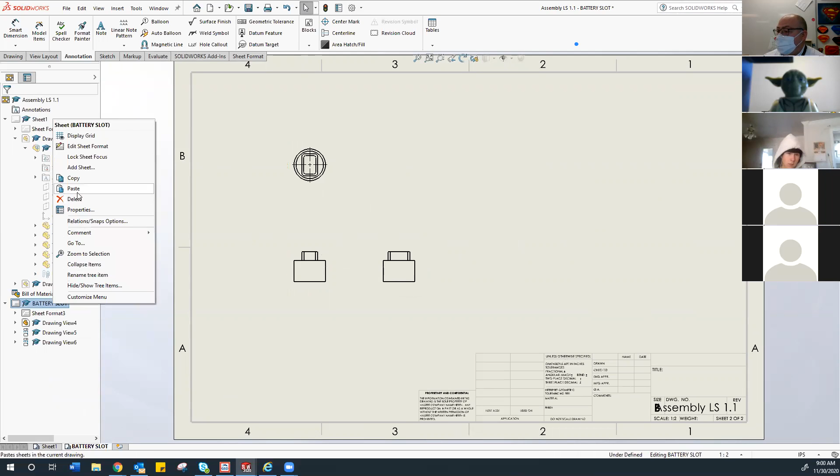Now I'm still 1/2 scale on this sheet. Notice on my side though, there's sheet 1, there's my battery slot. And then right click and then edit the properties on that sheet and go 1:1 and apply those changes. So this sheet now has a different scale. Let's pull these apart a little bit.

Okay, now this is the battery slot. This needs to be dimensioned. There's a lot going on here. And this is where you're going to spend a lot of time. Okay, and I apologize, it's a lot of time. This is probably the boring part of what goes on in this world. Notice when you move the alignments, the things that are aligned stay aligned. So you can position things out, but they have to stay in alignment. Dimensions that are common go between the views, okay?

So let me illustrate what I'm talking about here. We'll come back. I'm not going to do all the dimensions on this today, but I'm going to do quite a few of them because there's some things that have to happen.

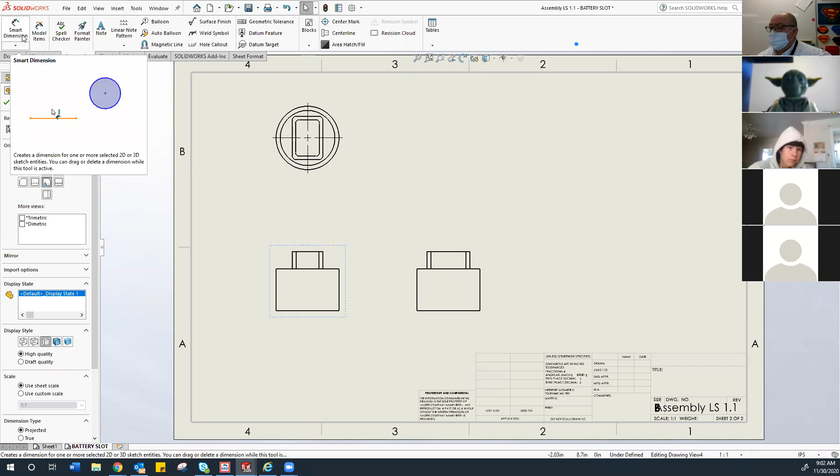I'm going to use my smart dimensions here to dimension things out. I'm going to start at the top view and do the diameter. This diameter needs to come out as a dimension because it's the same value for the view below. So I look at that and say, okay, it's going to go between these two views. So it's the same. This outer diameter is a set value. It has to stay the same.

If I do the inside diameter, that slides. I'm trying to remember how this one goes. This one slides. Nope, this one's the one that changes. This one's the set one. Can't remember how I did this. So you got to float around there till you get your diameter. Come on, do the diameter. There you go.

And when you bring the next one in, don't line the text right up on top of itself. That's considered a no-no. Stagger it over because your eye can read that better when they're not directly lined up. So let them stagger a little bit.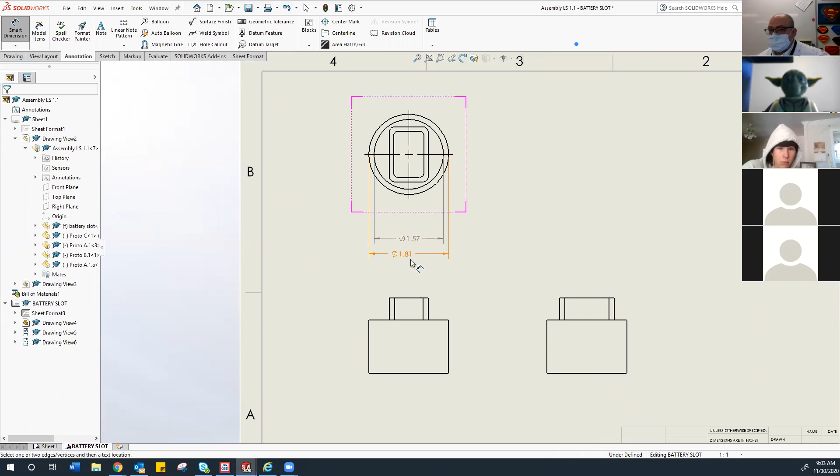What happens on this is this slides up inside the other one, so there's a tolerance on this. Remember, we did a tolerance of 0.003. So I'm going to show you a tolerance here. The tolerance means there's an allowance that it can be a little bit bigger, but not smaller, or a little bit smaller, but not bigger. So we're saying you can do it, but not do everything you think you can do.

So I'm going to change this one right here. I click on that dimension, and over on the side it says my tolerance precision. So I go into that and do what's called a limit tolerance. A limit is that maximum minimum tolerance issue. So I click on limit, and it says it cannot be any greater than this because it has to fit into the next part.

So you have to know how your lightsabers are going together. It cannot be greater than that, but it can be smaller by 0.003. So I put that in my minus area. I click in a non-text area to see what that looks like. Come on, catch up. And I'm not going out to 3 decimals, so it's not showing. So I got to do some fixing. I'm not seeing 3 decimals, and so my tolerance doesn't show at all.

So now we have to go up to the gear. We go to our options. Our options brings up a new panel, looks like this. We go down, there's display. There's a lot of fun stuff we'll do here, probably a lot more we'll do in January with it. I don't see anything here that has anything to do with my dimensions.

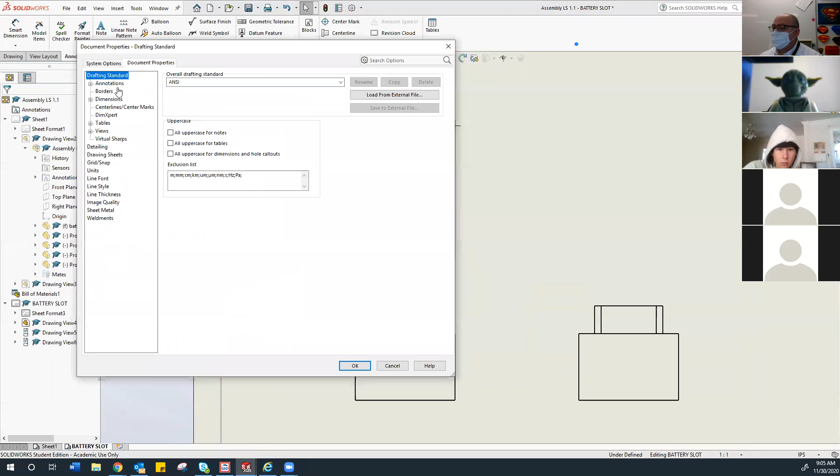So I go to document properties and to dimensions. And when I get onto dimensions, now I can look at my precision. And I want to go 3 decimal places. I do want you to do your decimals all to 3 decimals. So that's going to be non-negotiable.

Okay, no problem, kid. So we're going to do 3 decimals. Let's see what else we can change along here. You can change arrowheads and stuff, but we don't need to because they're set to ANSI standards. So that's good. And we can change our font if we wanted to. Try and stay in the Gothic style. That's kind of the traditional use we have here.

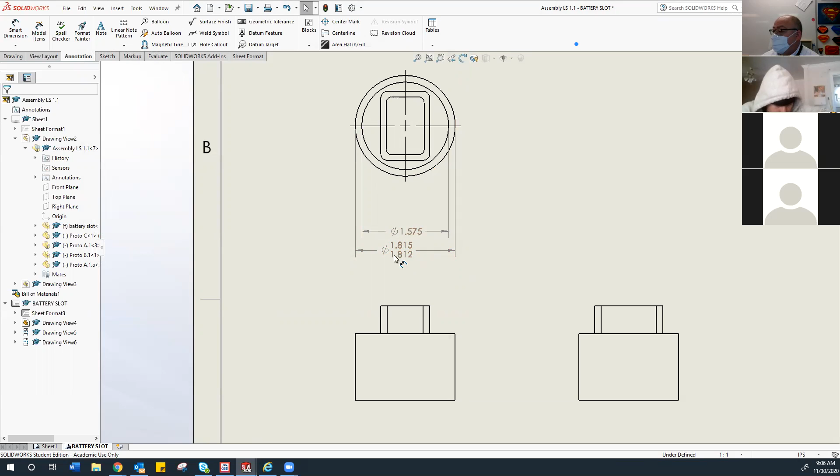So all I have to do is go to 3 decimals. I hit OK, it updates, and now I can see the difference. It also shows me something else that's going on here. This is not exactly the size I thought it was. So I notice I've got some different sizes in there. I'm off a little bit in my own design, which, yay, kind of sad, but it's good to know. And it works, it fits, so I'm going to stay with it.

So because these apply, now this 1.575 value applies down here as well, but I can't see where. So now I'm going to go to this front view. I'm going to go over to my display style, and then make the hidden lines visible.

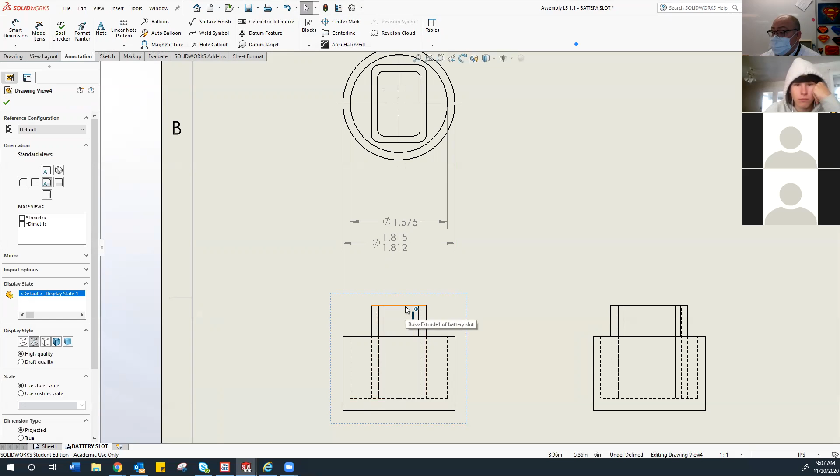Okay, so the lines go inside. Now you want to show hidden lines so we know there's hollowness or a cavity. But here's the thing that will cause you to fail these drawings like no tomorrow: you never, ever dimension a hidden line. These lines are great, but this could be a square - in fact, on the battery compartment it is. So you never dimension hidden lines. They're just there to convey this is hollow or shelled out. Don't dimension hidden lines. We find other ways to get that information, and I'll get through that as we go.

So I've got my diameters. I now need the battery compartment. I'm going to go back to my dimensions, and I've got radii on my corners. I don't know why, I just rounded them off - I thought it was kind of cool. So I'm going to show you how to dimension those. I'll take this one here because it's kind of up and out of the road, and bring that up to here.

So I've got a radius of 0.12, and I'm going to come down to the dimension text box on the right. Click in front of the R - R is for radius. In this case there are 4 of those, so put a 4, X, space. That means it happens 4 times - there are 4 radii of 0.12. That means the person looking at the drawing needs a little bit of a 3rd grade intelligence level to count to 4. Okay, so I check that one off.

I do the same thing with the inner one - another smart dimension, get the little guy on the inside. Now, you never do a radius straight out, it needs to have an angle to it, so you might have to position it. Those angles can be 30, 60, or 45 on leader lines. That is it - you do not ever do a straight shot leader.

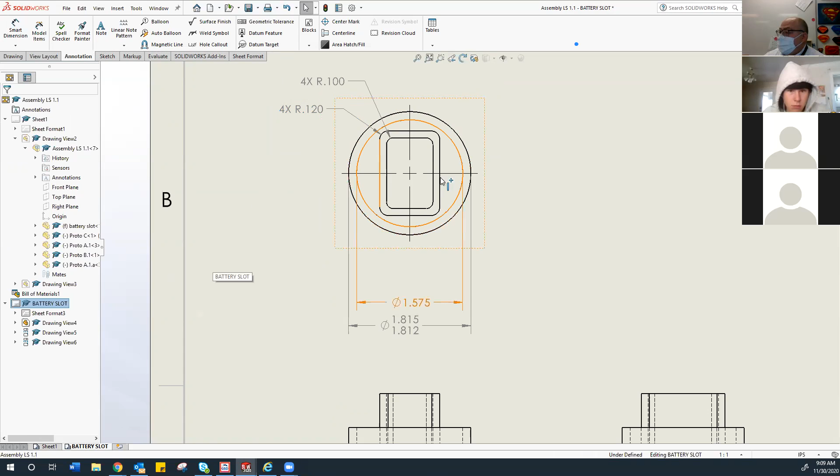If you're doing octagonal sides, you'll have 8; hexagons are 6. I've got a center line going through. If your center line is not shown, you can bring it up by coming across the top and doing a center mark right at the top. Make sure, because anything round needs a center line in the view that shows round. If it's a round object, you always dimension it where it shows as a round object - don't give the diameter down here. We don't ever dimension that diameter down here, that's why it's in the middle.

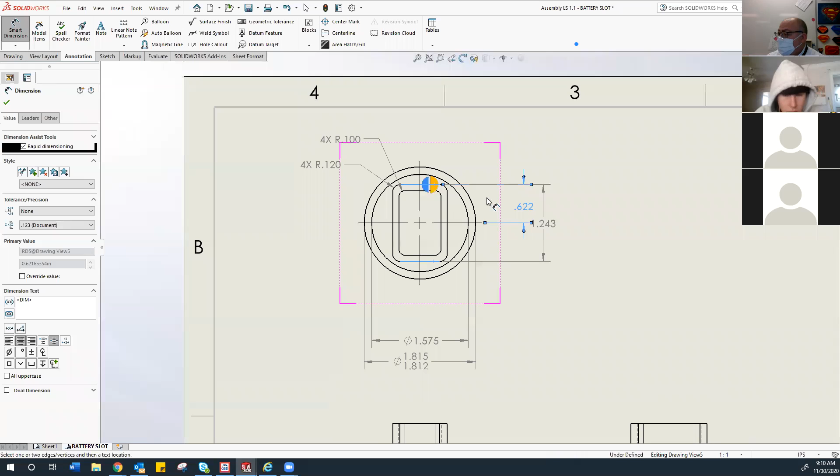So now I'm going to do the other dimensions here. I'm going to start with them based off the center point - one from here to here, pull it to the side, so that tells me from the center up. Then I'll do an overall and that side's dimension. I'll do the same below, go here, pull this one down. Now that's kind of tight, so bring the text out - if it feels tight, go ahead and slide it to the side.

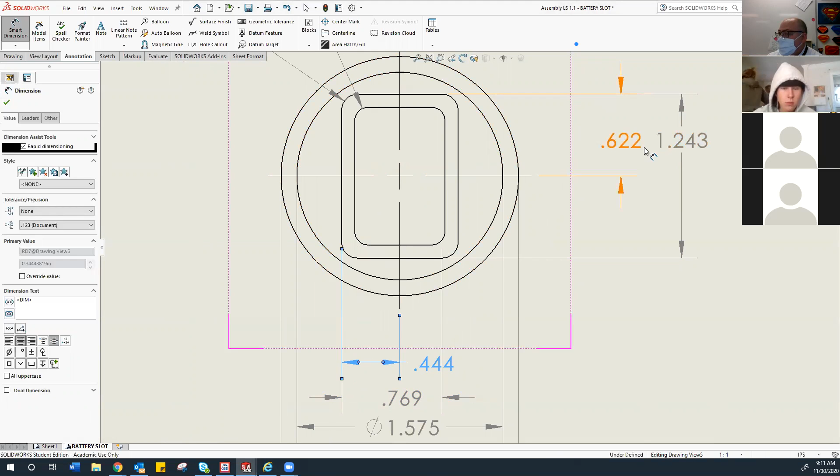And I'll do the outside now, do these two here. I'm starting to get a little crowded down here because I haven't done all my sides - in fact I probably dimensioned that in wrong for what I'm doing. So if you need to adjust your dimensions, you can take these little blue dots and move them. Then I've got to go back and modify this guy so he matches, because I'm doing the outside, since that's what I did here.

Now the diameters for this wall are important because it has to fit in the part, so I have to dimension that separately. But the wall for the battery, that's consistent, so I'm going to do my dimension from side to side and pull that out. Notice this one isn't a spot point, so I'm showing this dimension here. Behind the text I'm going to add a space and in capital letters 'TYP.' - that means this whole wall is the same thickness. That entire battery outline is 0.1, the whole thing.

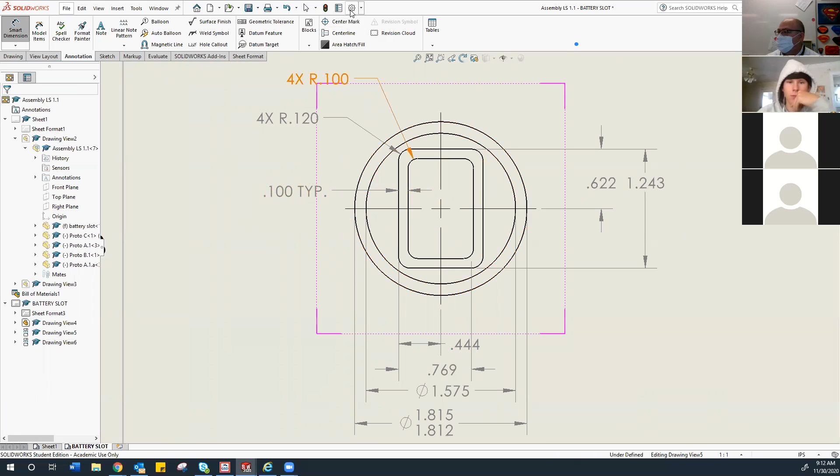Now I notice I don't have my leading zeros - oh, that's so sad, I better fix that while we're at it. Let's make things right - it's back in my options, document properties, dimensions. I need a leading zero, let's see what we can find where that one's at.

Include leading zeros, so we put a check mark there. Hit OK. Huh, I didn't do it. It didn't do it. I hit cancel again, didn't I? Probably.

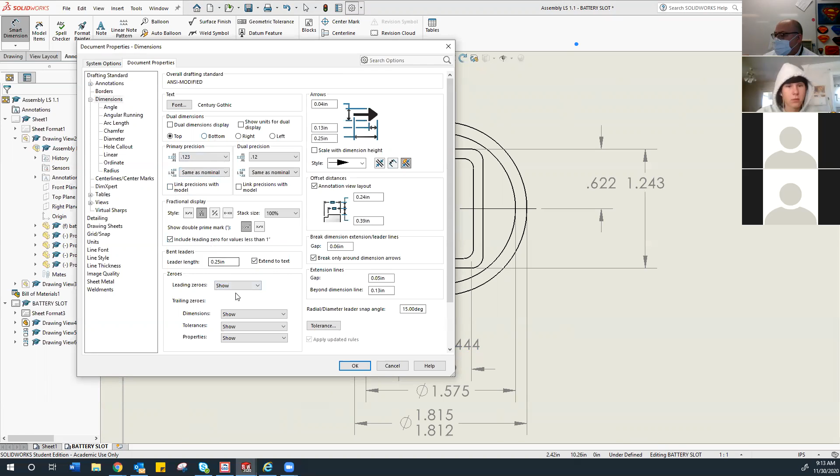Less than 1 inch. What else did I miss? What was the other? Zeros. Okay, show. So leading zeros, we're right there, so I hit OK. There they are. So I want that leading zero in front because in the United States we do a lot of Xeroxing still. So I want that leading zero.

Okay, that top part there is fully dimensioned. The sides then, the only dimension I'm going to get on the sides are heights. So I'm going to have an overall height. It's going to go between because it's the same for both. And then I'll do another one from there to there, and that would go to that point.

Same for both. Now there's a lot of room left on this sheet, so I would put a label underneath them. And I'll just put it right here because they go together. This will be the battery slot where I can see what I'm typing.

And again, I'm changing that font. And hopefully I can keep my internet connected here before we lose Zoom again. I'm not quite sure what's going on today, but it's what it is.

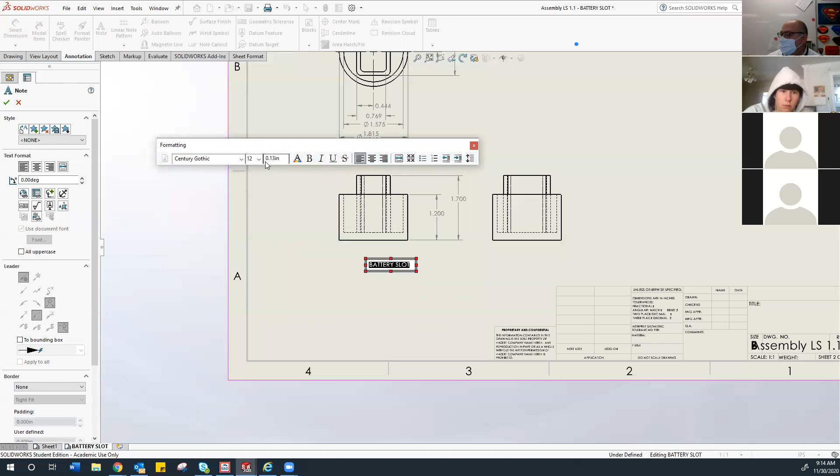So because it's the title, this goes to 0.2. Adjust the title box for size, and that goes right there, so it's labeled. That means I can bring another part in here and put 2 parts on one sheet. I want you to do that. I want you to make sure your sheet is full.

Okay, I am going to stop here because that dimensions everything I need on this first piece, and we'll do more. I'll edit my title block probably while you guys are working, and then let you guys do some work time, because some of you have a lot of questions you need to ask, and keep it moving that way.

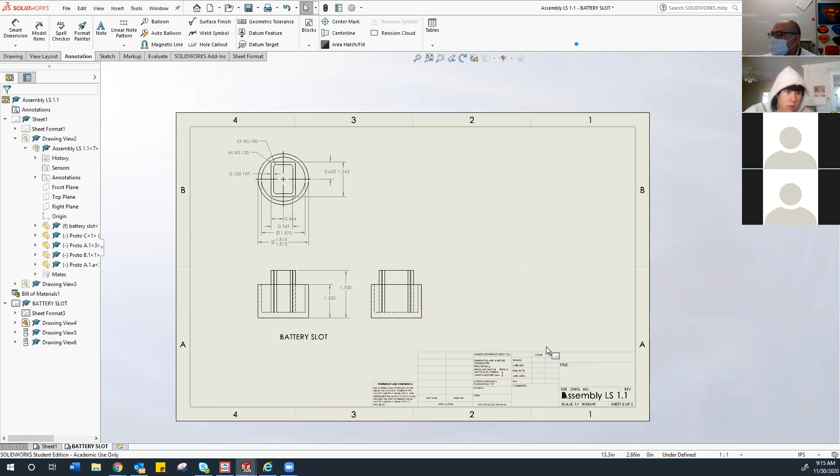Okay, so that's the lecture, dimensioning title blocks. We have a lot of that to put together, and I just noticed I don't like something. So that 0.444 is inside of this. This is an extension line right here. This is the dimension line with 2 arrow terminators. This is the dimension itself.

So I'm looking at that, and it's kind of hard to see what's going on there. I'm going to move that text out to the outside a little bit, just so there's no lines running through it. So I'm just going to position it so it's easier to read. Everything has to be easy to read, so look at it 3 times if you have to, make sure it's easy to read.

Okay, so things that fit together, limit dimension. What's the smallest it can be? If it's at that point, then what's the biggest it can be? And I'll help you with each of those as you need them. And so that's one piece fully dimensioned, ready to go. And that's my sheet.